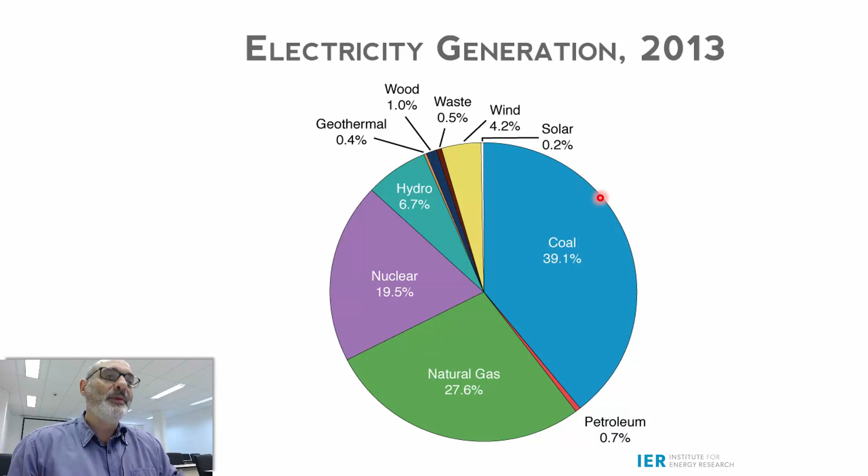I'm going back one slide just to emphasize that when we look at these types of sources, you can also think about what kind of machine you use to transform the energy content of these sources to electricity. They are mostly based on turbines, so that's what I'm showing you here. You use turbines to transform the energy content.

It may be specific heat, for instance, but it may be momentum in the case of wind, or gravitational energy in the case of hydropower. But you need a machine, a turbine, to transform this energy content to electricity. And when we talk about hydro and wind, those turbines are called impulse turbines. So what's that about, or what's this little number here, R equals 0?

So my point is that if almost 99% of all this generation uses turbines, it's very important to know how turbines work. So that's my point today. I want to show you how turbines work and how we can use this information, for instance, to optimize those systems of hydropower generation, or specifically water reservoirs.

So we call impulse turbines those that are based on momentum change. Let me just make a sketch here. In this kind of turbine you have momentum here, mass times velocity. You have a blade here, for instance, that changes the direction of this momentum. It simply changes direction. By doing this, you know there's going to be a force. The blade has to apply a force on the wind, and the reaction to this force is the force that is going to be used to generate electricity.

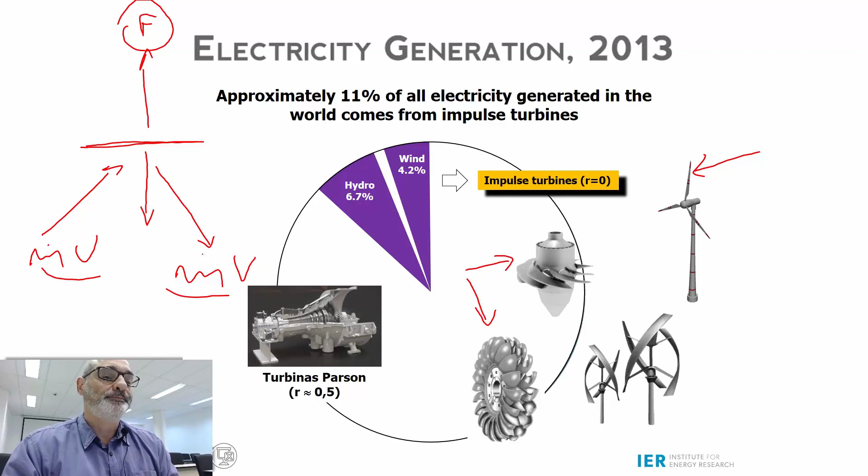Well, it depends. In the case of wind turbines, you may build from fiberglass. These blades can be made from fiberglass, while turbines for water usually use stainless steel. So stainless steel for water turbines, and a light material for wind turbines. Composite materials like fiberglass are very appropriate for wind turbines because they are resistant and very light.

Just a word about how things go here in Brazil, because we have a very different energy mix. In terms of electricity, most of our electricity is generated from hydropower, 70.6%. This is very interesting, very good, because it's a renewable source.

It's still solar energy, because it's the energy of the sun that takes the water from the ocean and transports it to high ground, so when it flows back to the ocean we can get energy from that.

So it's still solar energy, but the percentage here in Brazil is, I think, the biggest in the world. But we had a problem a few years ago, because if you put all your eggs in a single basket, you may have problems. Our eggs are concentrated on hydroelectricity, and

the amount of rain may vary during the years. A few years ago we had some problems, especially between 2013 and 14. The amount of water available for electricity generation decreased significantly, and we had to put thermal power plants into operation. These power plants run basically on petroleum and natural gas.

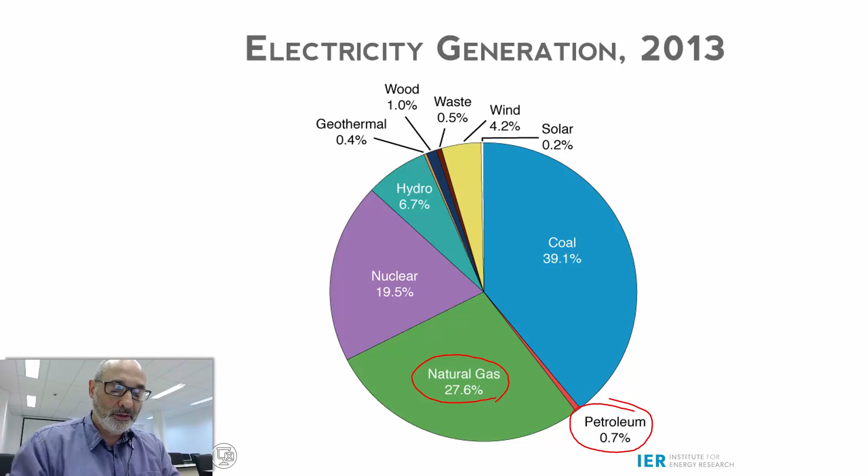So simply by putting these power plants into operation to supply demand, it changed a lot our electricity mix. You can see here, for instance, comparing 2013 and 14.

You can see that hydroelectricity decreased from 70 to 65%. Let me get my pointer, I think it's better. So this decreased, and the rest, especially coal, increased from 2.6 to 3.2. Petroleum, heavy oils, went from 5.3 to 6.8, and natural gas from 11.3 to 13.

So our energy grid, I wouldn't say deteriorated, because it's still very good. 65% is still a very good number, but that's not the tendency we would like to be seeing. So we have these thermal power plants in order to supply this.

But you have to do something to avoid this, because in addition, these thermal power plants are very inefficient—they are built just to be used during one week or one month, not during a whole year. So they are very inefficient power plants.

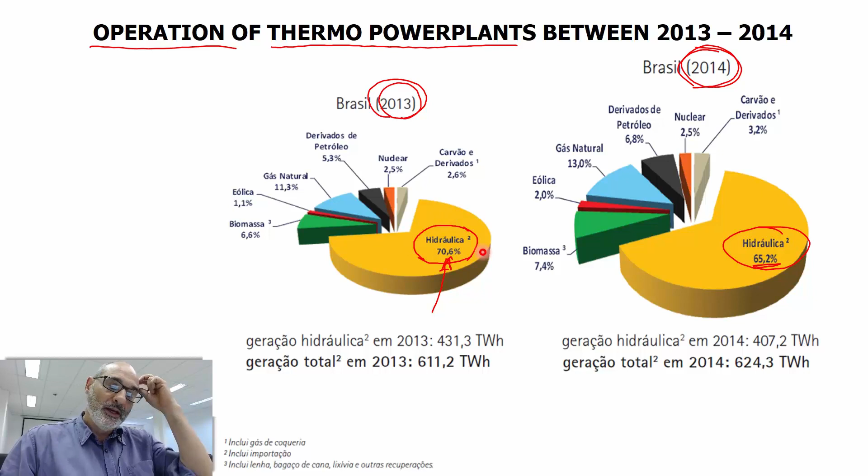So you see the importance of managing this resource. I'm going to talk today about managing it, in order to avoid or minimize this type of problem. Let me move on.

Let me talk about electricity generation in terms of potential. I'm going to compare the potentials of electricity generation in Brazil and in the world with the potential of hydroelectricity generation in the world. You're going to see that it's very limited.

Wind generation in Brazil—this is what we call the wind map here, the atlas of the wind potential, the Aeolian potential in Brazil. The darker colors represent higher potentials, and you see that it's mostly concentrated here on the northeast coast.

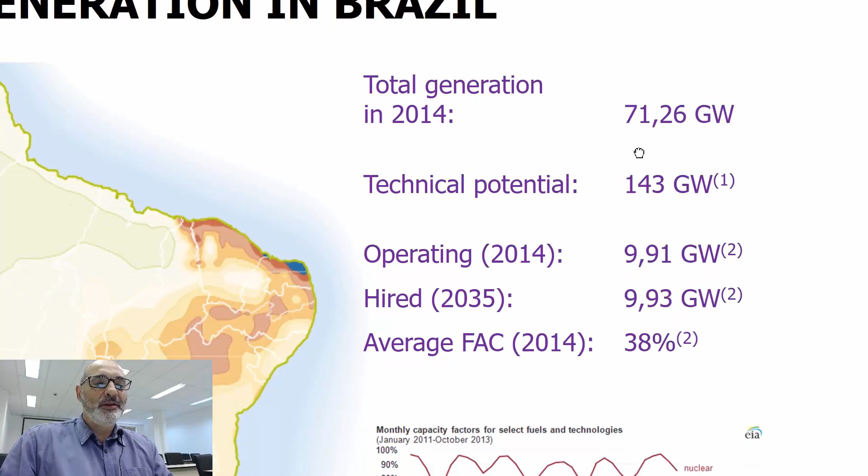Let's see some numbers. The total generation in 2014 is 71 gigawatts—so it's very high. The potential is 143. In 2014, we had only almost 10 gigawatts, and by 2035, another 10 gigawatts.

I'm going to talk a little bit about how energy is commercialized here in Brazil, about those energy figures you hear on television and in newspapers—what they mean and how we calculate these numbers, like 10 gigawatts. Another important point is that the capacity factor of our wind potential is a little higher than the world average, 38%.

This number, 38%, means I have to unzoom in order to write something down.

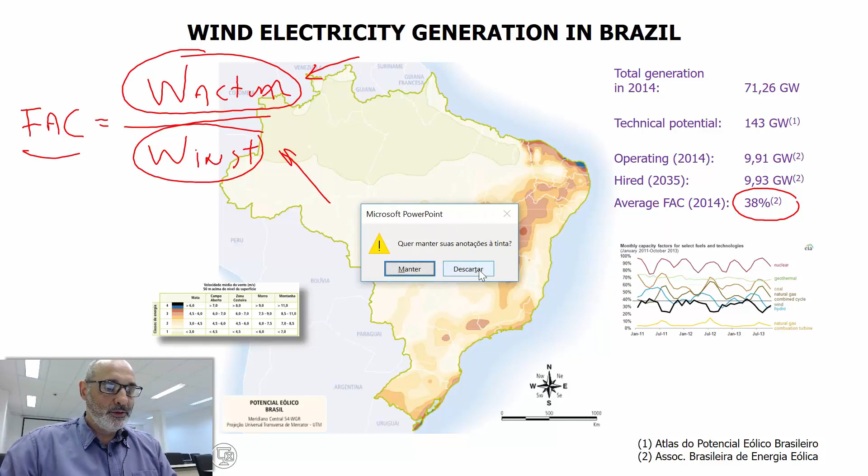In addition to these potentials, let me zoom again. So in addition to the potential, you see those colors here, they represent wind speed. Black and blue is more than 6 meters per second, orange is from 4.5 to 6, and so on. São Carlos, just to give you an idea, our region here in the state of São Paulo ranges between 0 and 3. I know São Carlos and Campinas get a lot of wind, but we're not even orange, we're yellow, or around there, in the state of São Paulo. The potential for wind generation here is low, except for the Mantiqueira region.

But that's the potential. I'm going to show you the equation, what this means, how you can transform this into kilowatts of electricity.

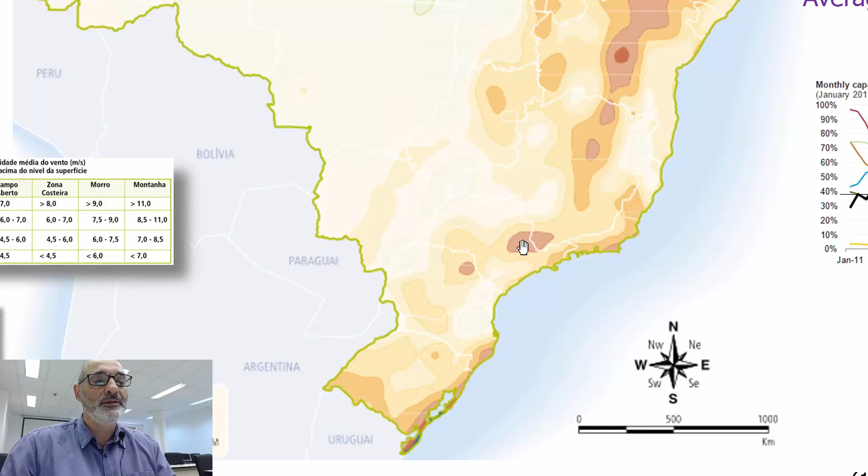But in addition to this number, you also have to account for the intermittency of the wind. The average Brazilian intermittency is a little bit higher when we compare that with other sources, which I'm showing here. I have an enlarged picture here. This graph shows the intermittency of different kinds of generation. Nuclear, you see that it varies during a year. You may ask yourself, why does nuclear generation vary in time? Because you have to stop, for instance, for maintenance. You have several types of problems that make it impossible to have 100% constant generation.

It's not unnatural, this oscillation is natural. Geothermal energy is the most constant, typically. And you see wind here in black. This curve is wind generation in the world, and our average is represented here in dotted line. It's 38%, and it's visually a little bit higher than the world average. So we don't have a lot of wind sources, but they are very stable. This capacity factor is a little bit higher, and we have 143 gigawatts. I don't know if you have an idea about this number, but this is almost 10 Itaipus.

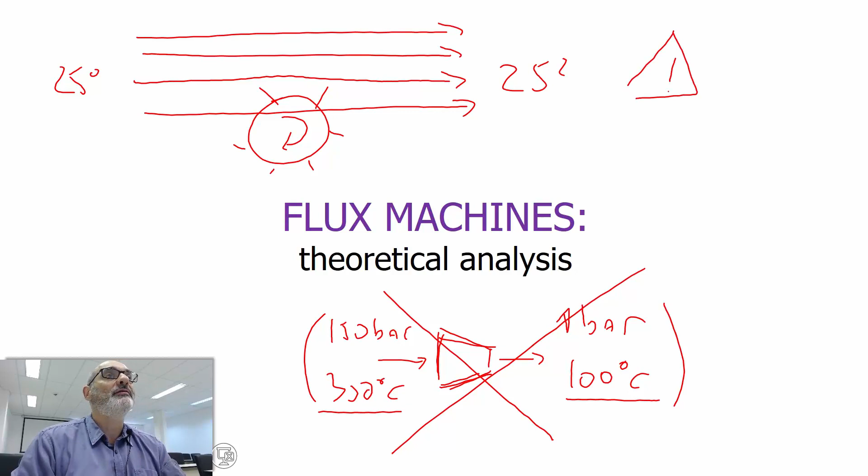So I'm not talking about this right now. I'm talking about this type of generation here, in which you don't have temperature variation during the process. So what are the equations?

Well, they have to be based on the first law of thermodynamics, so I'm recalling the first law of thermodynamics, and just to show you the thermal component of energy - remember this is the energy inventory - you have heat and work going in and coming out of the control volume of your system, and you have energy associated with these mass flow rates.

What I want to highlight, because this expression you already know, are the components. You have a component associated with thermal energy - we could call it thermal energy, associated with temperature. And you also have components associated with mechanical energy, related to gravity.

So gravitational energy, and related to kinetic energy. So what we're going to analyze here are turbines that use these components, these two components, what we call mechanical energy. You're going to see that wind turbines use these components, and water turbines mostly use these components, in most of the cases. So that's what I'm going to show you.

Yeah, go on. I lost signal. I lost the background. From our conference, I can do nothing about that except verify that it's on. YouTube, yeah, I'm still transmitting. Let me see on YouTube. Yeah, it's still being transmitted through YouTube. So I hope you get a signal in a few moments. Okay, let me continue.

I was talking about measuring the velocity of the wind and also the pressure along these lines. Velocity, as I said, is decreasing from left to right, from V1 to V4, and you have a continuous line because you have continuity; the mass flow rate cannot change. Pressure, on the other hand, has a jump here. Since velocity is decreasing, pressure is increasing, and you have a step here, and it goes to the maximum at the exit.

This step, this difference, multiplied by the area of the windmill, gives you this force, which is the propulsive force that's going to be used for electricity generation. So the reason why you have this step is the force applied by the blades. Let's move on and write down our equation.

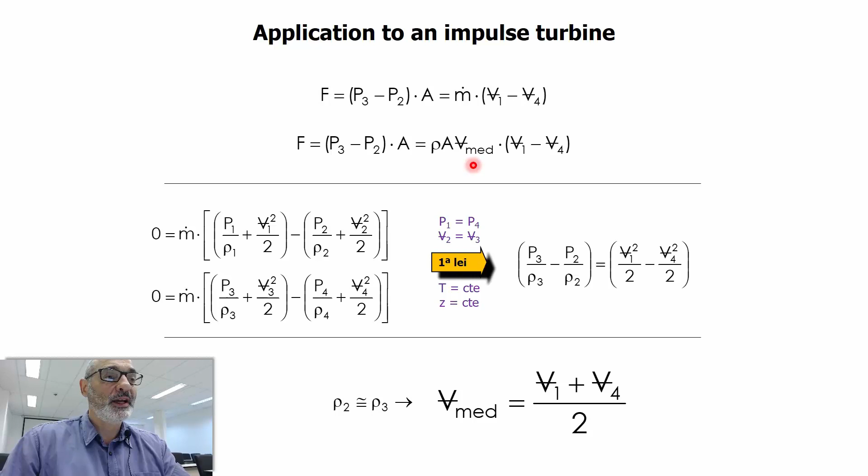And we can use this equation, combined... let me just explain where I want to get to. I want to define a way of calculating an average speed for our assessments of the wind potential. I forgot an important formula: you can define a kind of power density of the wind. If you divide W by the area of your windmill, you have small w, in watts per square meter. That's the potential density of the wind.

So if you want to generate, I don't know, 1 gigawatt of electricity from wind, and your wind is 6 meters per second in that particular place, you can use these numbers in order to calculate the amount of area that you're going to need.

And area means number of windmills that you're going to need to generate that amount of power. So that's how you use this part. But this is a theoretical maximum. You're going to see that you still have to multiply by the capacity factor, because this amount is instantaneous, obviously. So if you have this during 24 hours a day during the whole year, but that's not a reality, that's not practical.

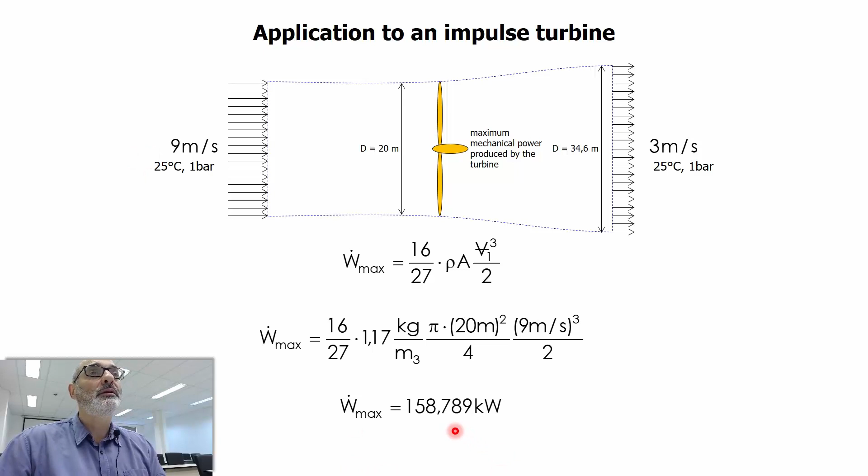This is a significant number, but remember, this is comparatively high speed. As I mentioned, this must be in Patagonia or in Greenland, for instance. And if your capacity, yeah, go on. What happens at lower temperature? Let's say you have 9 meters per second. Lower temperatures affect the density. So the density at lower temperatures is higher, so it's going to increase. We can do this calculation right now.

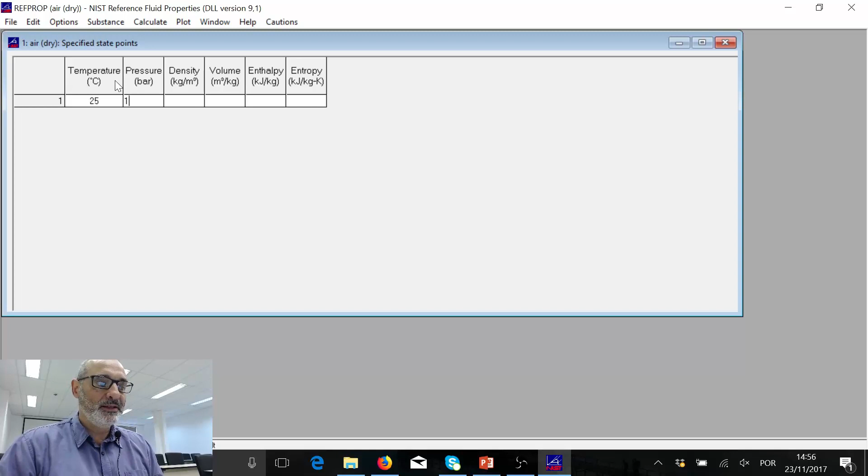For instance, I'm going to stop my presentation and calculate the density of air at these temperatures. Because I mentioned this must be in Patagonia, let's calculate that near 0 degrees. So let me choose pseudo-fluid air, and let's calculate the density at 25 degrees, 1 bar, that's the example I showed you, and 0 degrees, 1 bar. So you see density varies from 1.16 to 1.27.

So in these calculations, 1.17 is going to change to 1.30 or something like this, or 1.28. So this number here is going to be 1.28. So it's going to increase this power a little bit. So it's better to have lower temperatures because the density is higher. Okay? So that's an example of how these equations must be used.

You also remember this is the maximum. You should multiply this by the capacity factor, which here in Brazil is 38% on average. So you're going to get a smaller number. So the number that you obtain here, just to start using the Brazilian jargon, is what we call physical power. So I'm going to write it in English. Physical power, that's the Brazilian term. That's the average power that you can get in a year.

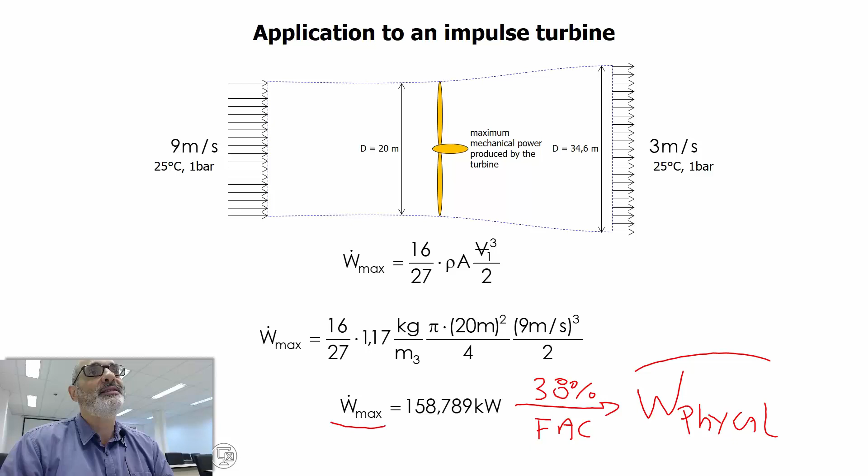So if you're going to sell this energy to someone, you're not going to sell this number. You're going to sell this one, because that is what you can expect from this statistical number here, the capacity factor. Let me move on.

So just to still develop these equations, that's the formula that we deduced for the wind generation in terms of ξ, which is, remember, the relation between exit to input wind velocity, what we call power coefficient. So wind power is this number. It's impossible to extract 100% of this power from the wind. It's physically impossible.

Well, by design, as I showed you, ξ can be made to be equal to 1/3, which maximizes the power coefficient. If you plot the power coefficient here, you see that the maximum value is attained when ξ equals 1/3, just to show you this. And when you replace 1/3 in this formula, you get 16 divided by 27. So that's why you have that strange number, 16 divided by 27.

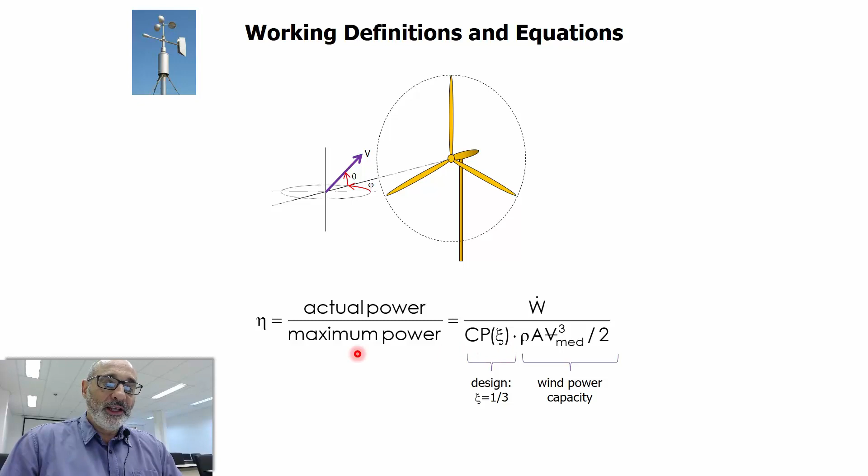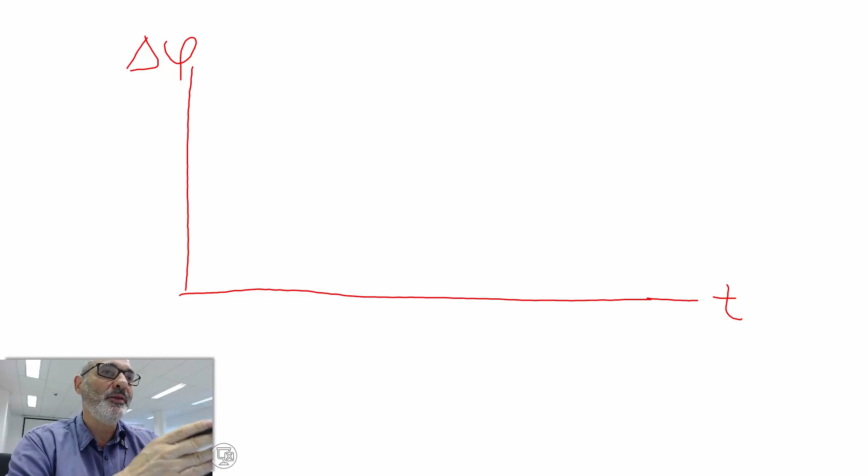Let me explain this better. I'm going to create a blank slide here in order to draw something for you. So, as I was saying, suppose that here we have time, and here is the difference in terms of alignment, delta phi. Delta phi is the alignment of the windmill compared with the wind direction. Sorry, let me change a little bit here. So here is time. Let me get another color.

So if you have perfect alignment during all the time, it's going to be like this signal here. If the wind changes, the windmill can realign, but it's going to take some time. So the wind changes and you have a deviation during some amount of time, and the point is that during this period here, from this instant to this, you have decreased conversion efficiency.

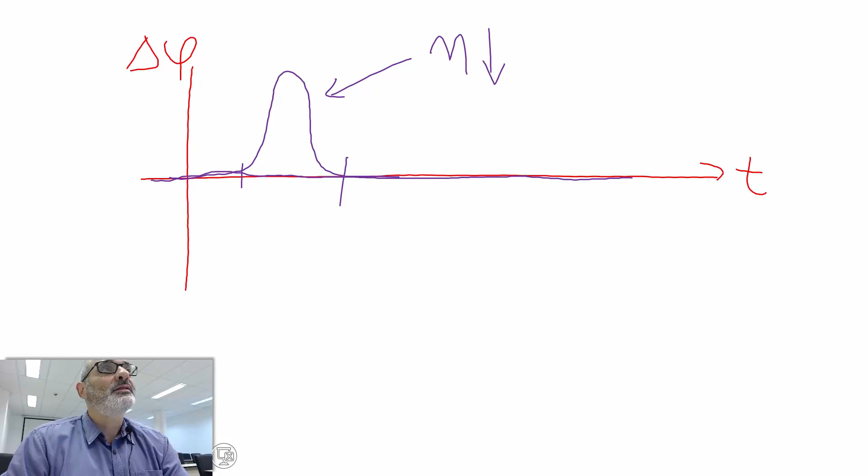So all windmills are built to realign with the wind automatically, but depending on the geometry and the configuration of the mill, this may take some time. Is this clear for you? Okay, let me move on.

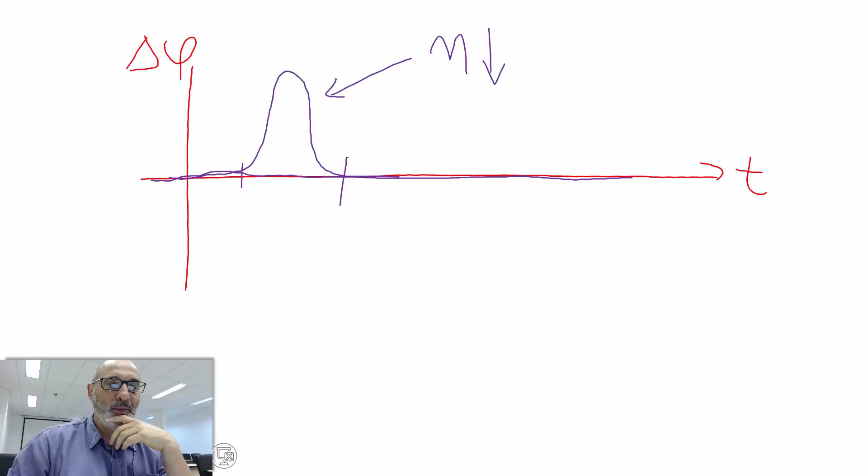And I want to talk now about other factors causing efficiency losses, because as I was elaborating here, you have a problem related to the direction of the wind: wind coming from a certain direction and your mill slightly misaligned with it. You have other types of effects, for instance, what we call wingtip effects. The blades here are exactly like airplane wings. You have high pressure here and low pressure here.

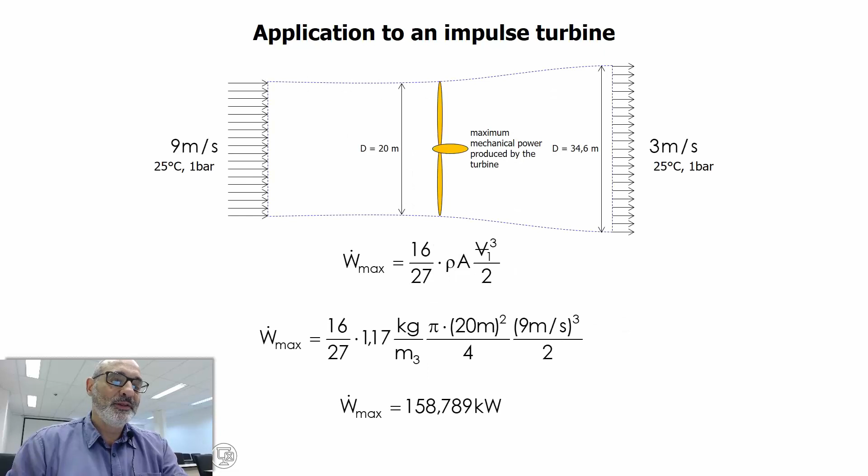I'm going back a few slides just to show you this. You see that you have low pressure here and high pressure here, and the difference is exactly the lift force. So with high pressure here and low pressure at the wing tip, what's going to happen? The fluid is going to move from the high pressure region to the low pressure region, forming what we call wingtip vortices.

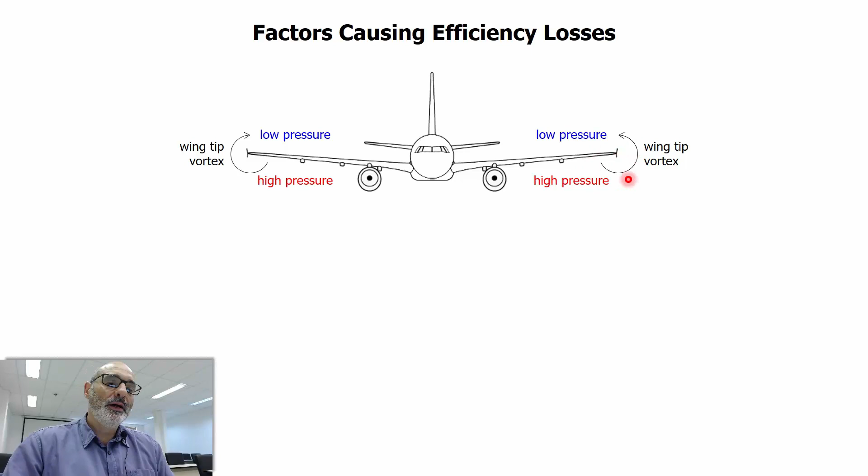So you have these vortices here, and they consume energy because they use energy to create this circular movement. This is a very common phenomenon in airplanes. It's very easy to see: when an airplane passes, you see these vortices. If you type wingtip vortex on the internet, you're going to get very beautiful pictures of wingtip vortices.

But the point here is that you have losses of energy, because you're spending energy to create this circular movement, and the idea was to convert all the internal energy into kinetic energy, in the case of the airplane. So you have wingtip vortices in windmills.

Just to show you, in aeronautical engineering, in order to solve this problem, the engineers developed these small structures here, called winglets. They developed these devices, which generate an opposing effect. They tend to cancel the vortex, but they cause drag. So it's a trade-off solution.

Another possibility is, well, if the problem is at the tip of the wing, let's build a wing without a tip. So you build this kind of structure here. This is very optimistic, I should say, but there were some models that were built, and you can see this in windmills.

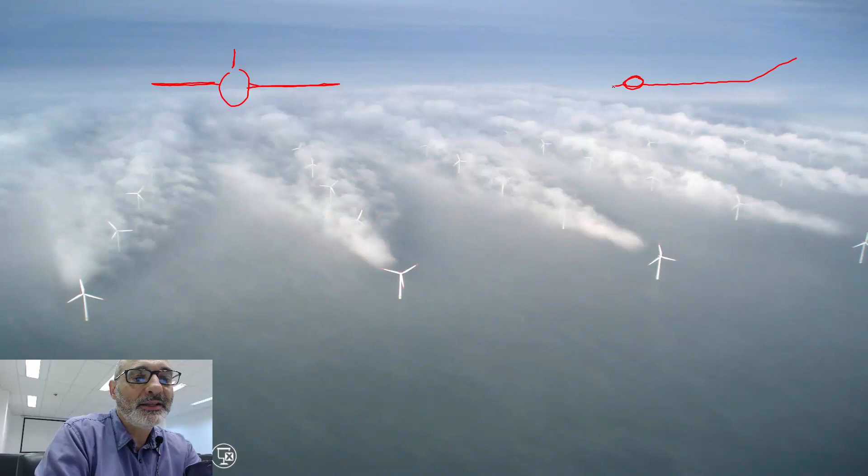And that also explains why gliders, let me draw something here, I don't know if I'm going to be able to draw a glider here, but let's compare. For instance, a commercial airplane is something like this, and a glider, the length of the wings, sometimes it's even like this, it's much longer. So that explains why these gliders have very long wings.

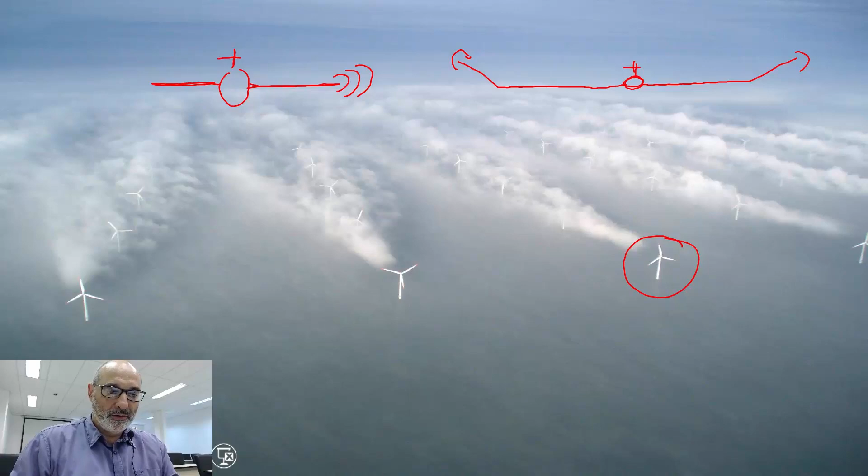Because, well, the longer the wing, the smaller these vortices here. And that's why also these windmills have very, very slim and long blades, in order to decrease this phenomenon. Some words about wind turbines, some details here to depict a scenario.

First, the longer the blade, the more efficient the windmill, because you decrease these wingtip vortices. So the tendency you see during the years is to have bigger and bigger windmills. Well, after, I know, 100 meters, you start having problems building and installing these windmills, because you have to produce these blades and you have to travel through the countryside, where you have small roads.

So what limits the size of the largest windmill onshore is actually the road systems, the size of the roads. So that is also an advantage of moving offshore. Offshore you can build very big windmills, because you have a barge here, for instance, with a crane, and you can build these very, very large windmills. So no problem. And that's the actual tendency.

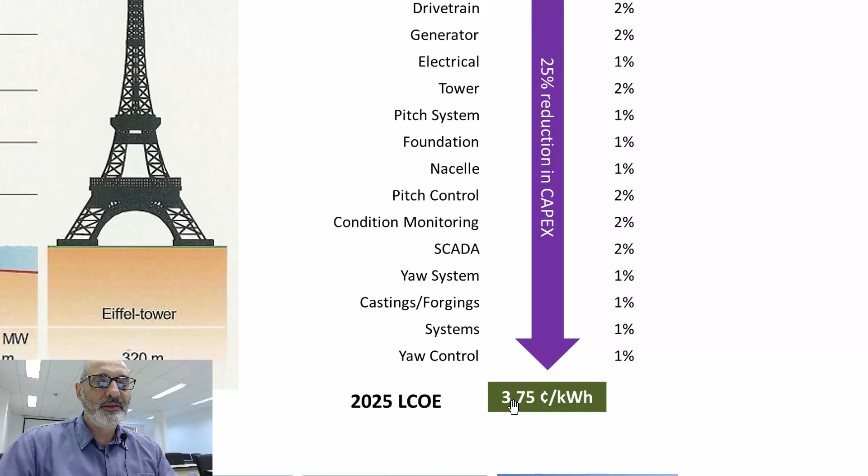4.5 cents per kilowatt hour. In 10 years, it's going to decrease, expected to decrease to 3.75, and this decrease, yeah, that's what's interesting about this result here. Okay, so this decrease

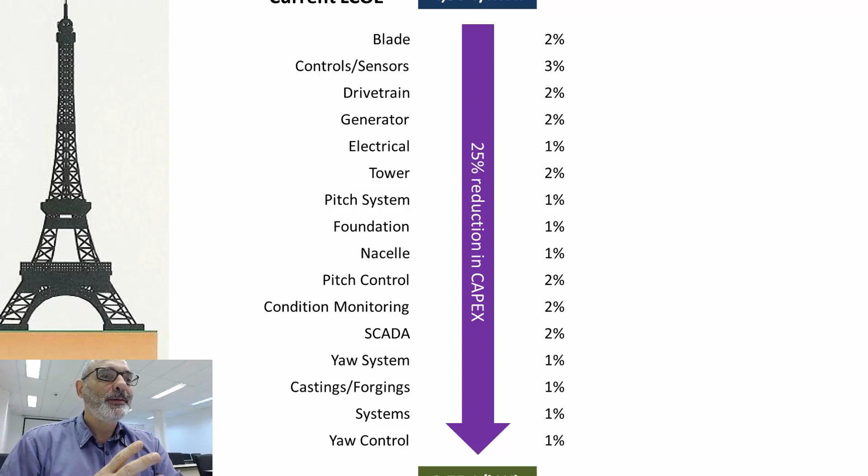is obtained by a series of incremental gains. You have a small gain to obtain in blade geometry, for instance. You have a small gain in order to obtain, for instance, in developing more stable, more structurally stable towers, and this is related to the deviation, the stability of the windmill, of the turbine. So you have a series of incremental developments, the controlling system, the yaw system, that's what I'm talking about, and so on. The foundations, this is also to structural stability and so on. So you see, you have a very significant reduction, 25% in the cost, but this reduction is actually obtained through a series of small incremental developments.

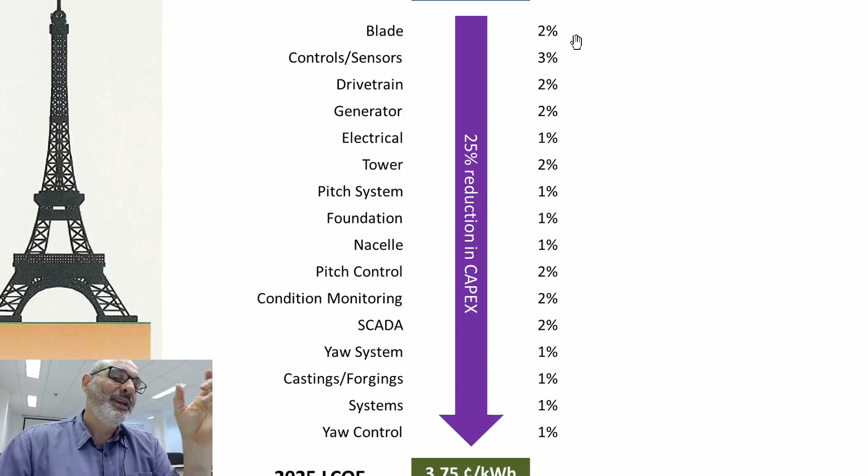And this is to show you, to justify when we state that wind generation, wind turbines, is already a very mature technology. It's not a technology in development. Well, these types of technology, these balloon turbines and so on, I'm going to show you another ones in a few moments, are still in development. But these very traditional windmills, this is already a very mature technology. Okay, you can say that, for instance, from this type of scenario.

Moving on, you have very untraditional windmills or types of ways of generating electricity. As I mentioned, balloons. So the higher you go, the stronger the winds.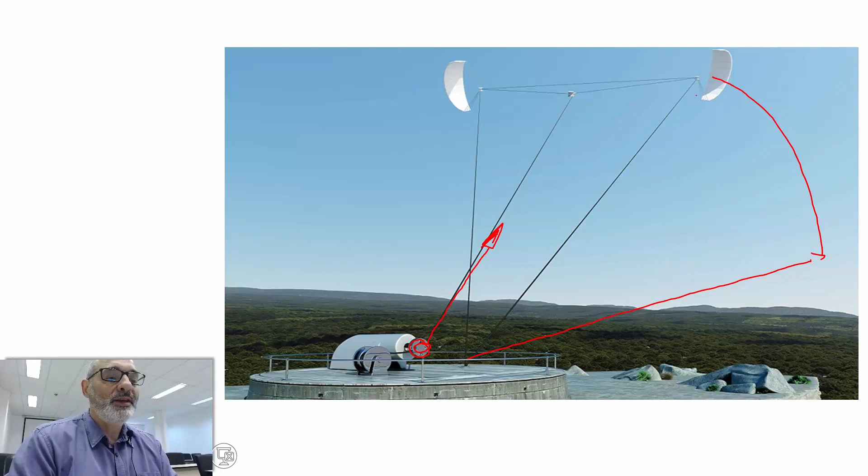So it's very simple. You see this pulley here. So what the robot does, it increases the length here, it gives some slack to the kite. So by increasing this length, what's going to happen? It's going further away and down here. So you release the force here, and the kite goes down and farther apart. Then when you do this, you have a force. So by doing this, the kite manages to generate some force. So the kite is pulling this cable here. So you have a force here times this rotation here, so you have power.

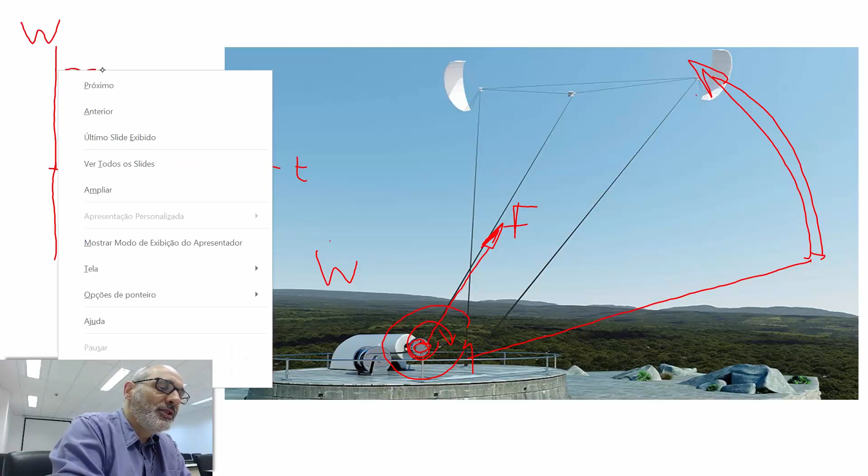But your kite goes down, then you have to rewind the cable so that the kite goes up again. So you're going to spend some power. So you can generate power in this first phase, and you spend power on the last phase. So the idea, if you plot the power that you generate and the power that you spend during time, is that you can generate power for a certain period, then you have to spend some power, then you generate again. You see that the average is positive, so you can generate some power from the system. That's explained in this graph here. You have an active phase in which you can generate power, and you have a return phase in which you may or may not spend a significant amount of power. So that's a technology that is being tested.

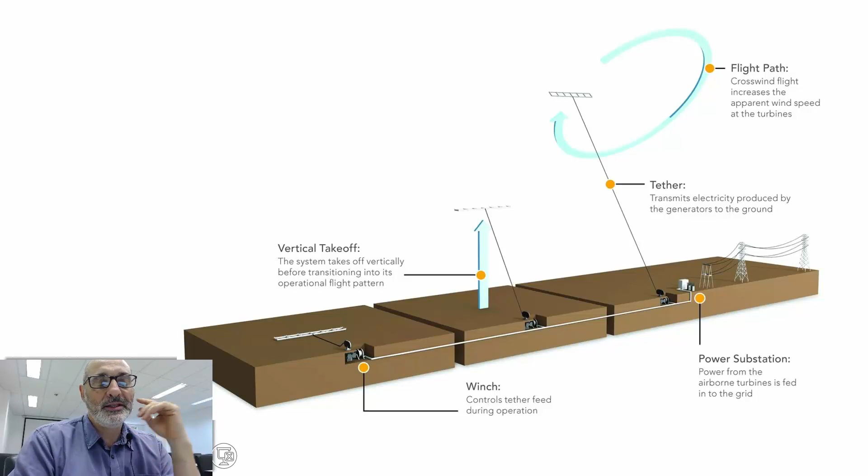You have robots to do this, that in addition to making these operations, it assures takeoff and several other types of piloting of this wing, because it's actually a wing. This is another type of kite. It's a little bit different from this configuration here, because this one does this type of movement here. This one is a wing, it circulates like this, and during this circle you have an active phase and a passive phase, I would say, like this, in terms of energy generation.

Well, this is research, it's not widespread applied. You also have... I want to start switching, because I have to hurry up a little bit.

This is feasible, but here in Brazil especially, I would say this is not practical, because our rivers contain a lot of organic materials, biomass. You have trees, you have all types of debris being carried by the river. You may have a whole tree being carried, and when this debris hits these windmills, it's going to spoil. You have maintenance problems. So this is a problem here in Brazil. For this to be applicable, you have to have very clean rivers, and this is not very easy to get, but it's possible.

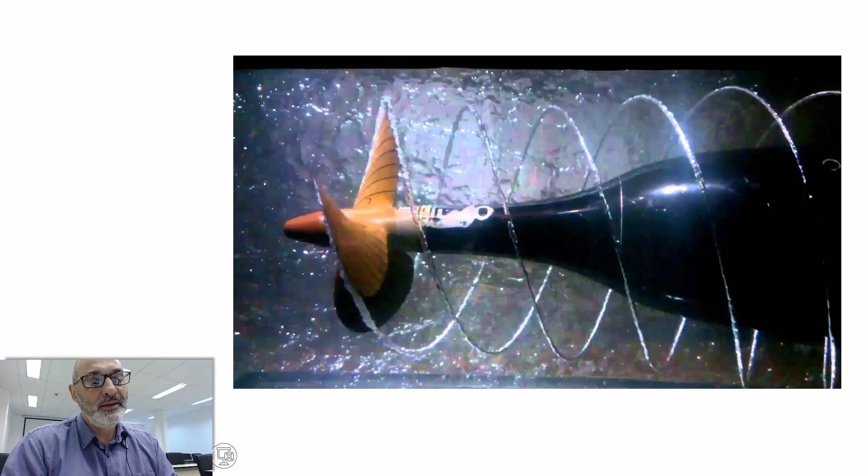Another problem you have related to water, that you don't have in air, is cavitation. Since you have different velocities, there may be some places, especially on the tips, where the velocity is very high, and when the velocity is high, the pressure is low - that's Bernoulli's equation. So when the pressure is low, you may have water vapor. These small bubbles are vapor bubbles, and that's cavitation. I don't know if you've heard the term cavitation.

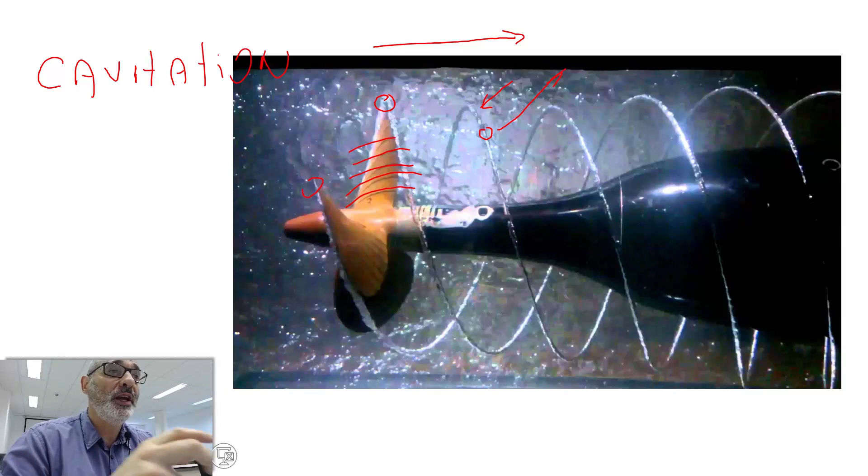The problem is that when you have a bubble formed, this bubble is stable when the pressure is low, but if for some reason this bubble goes into a region where the pressure is high, it's going to implode. And when a bubble implodes, it causes what we call a water hammer - like a huge impact related to the implosion of these bubbles. You may have very huge pressures associated with this implosion, and these can erode parts of the blades, as shown here. So you have maintenance problems.

I remember some years ago, or some 10 years ago, I visited one of these hydroelectric power plants here near São Carlos, in Ibitinga. The turbine is very big - a person here would be something like this. You can go on top, and we had this - you could observe this kind of problem. So the workers were correcting this problem, because you have cavitation.

Is there a problem in water pumps also? Yeah, cavitation? Yeah, exactly, you may have this. It's the same thing? Yeah, exactly the same thing - cavitation related to these very huge pressure variations due to the implosion of these cavitation bubbles. If you could see with a microscope, it's like having microscopic hammers impacting on the surface of the metal, and you get this kind of erosion. It's a very big problem even for ships - you have this in ships also. Cavitation is a very significant problem.

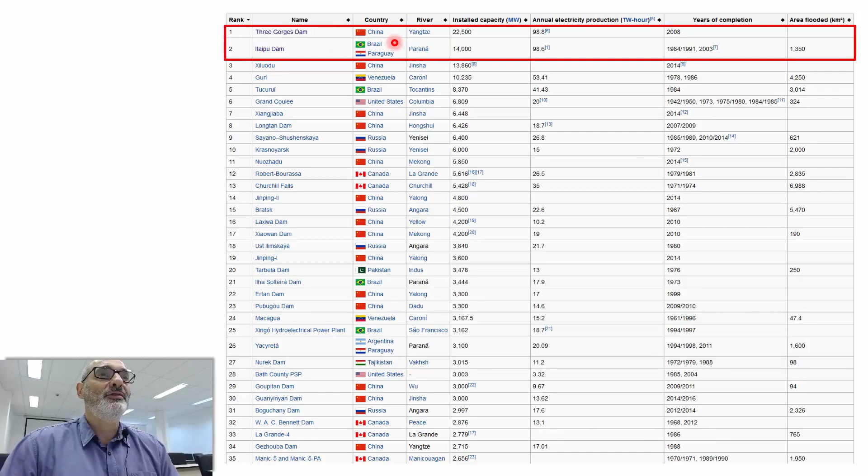I'm emphasizing this point because here in Brazil we have a special concern with the environmental impact that these reservoirs are going to cause in a specific region. This is okay, but we must be aware that reducing the reservoirs reduces their efficiency. That's the central point of this talk, and I want to justify this through a simulation.

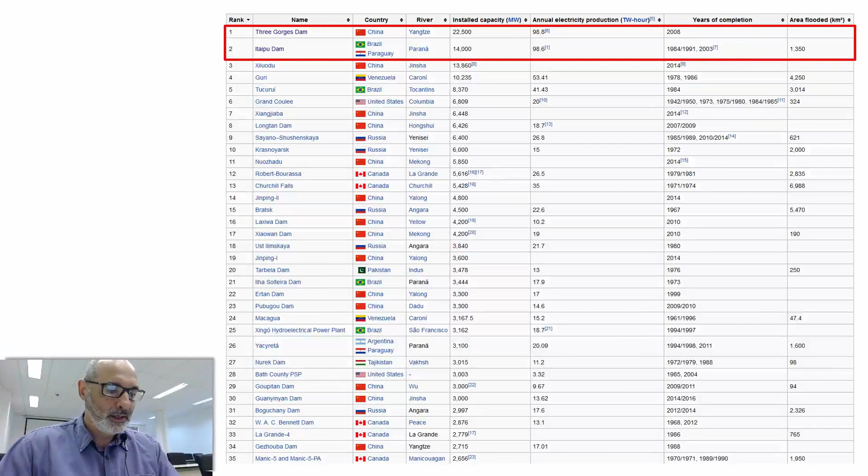What I wanted to highlight is not the installed power. Let me go back a few slides and zoom in to show you the installed capacities and annual generation. The installed capacity in Three Gorges Dam is almost twice that of Itaipu, but the annual generation is almost the same. Why is that? It's not only due to the capacity factor, but also due to the reservoir - I'm going to show you this.

I came back here because the numbers are very out of date. So the point is the reservoir, not the turbines. As I mentioned in the first slides, the functionality of the reservoirs - you see the reservoirs compared here in this table, Itaipu and Three Gorges. In Portuguese, gorges is garganta.

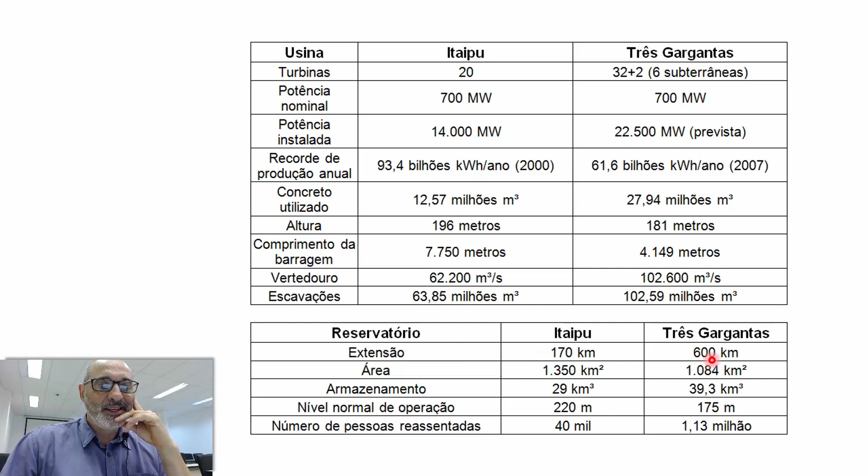Since Three Gorges is in a valley, the extension is very significant, 600 kilometers, while in Itaipu it's 170 kilometers. The area is roughly the same - Itaipu is larger because, as I showed in the picture, it's a very flat region in Brazil. The amount of water stored is 29 cubic kilometers versus almost 40 cubic kilometers. This is stored energy, and the potential is related to the height of the water: 220 meters in Itaipu and 175 meters in Three Gorges.

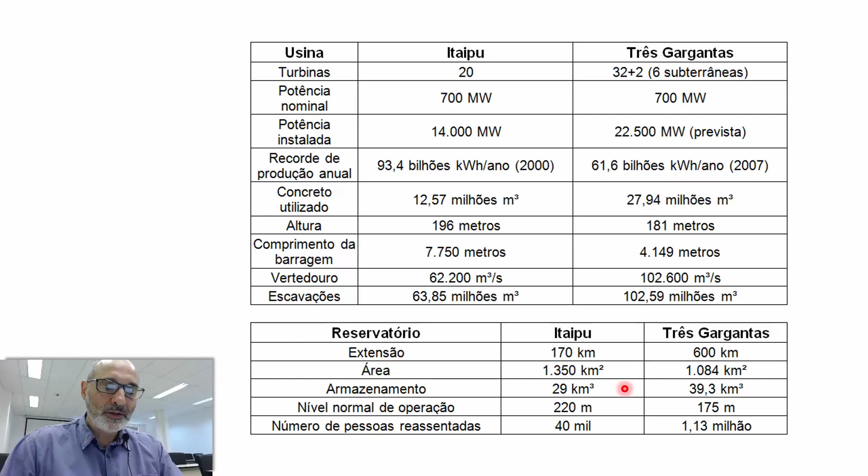So with these characteristics, we're going to run our final simulation. I'm going to model the system, and then we're going to change the size of the reservoirs in order to simulate the operation of a system with big reservoirs and with small reservoirs. The idea is to compare Itaipu and Three Gorges, or the equivalent systems.

Let's see the equations for this type of generation. You have a reservoir, so you have a difference in height from point 1 to point 2. If you define a control volume, imagine a small tube starting at point 1 and going all the way through the turbine, ending up at point 2 - that's my control volume.

I'm not going to be able to draw this properly, but you can use your imagination and imagine a small tube going from 1 to 2, and that's going to be our control volume, okay? So when we write the equation, energy conservation, for this control volume, that's the same equation as before, in which we neglected the internal energy because temperature is constant. That's the equation that you have: pressure, velocity, and gravity, the Z components.

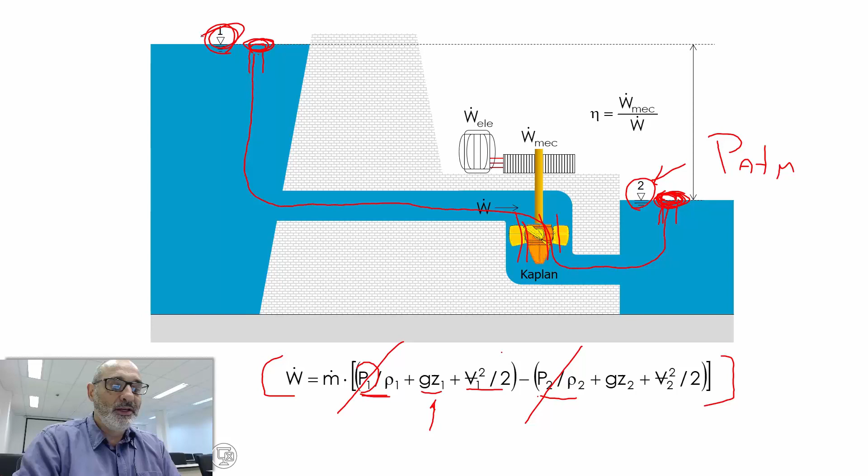What's the velocity at 1 and what's the velocity at 2? It's 0. It's the same. I'm not talking about the velocity here at the turbine, I'm talking about the velocity at this position and at this position. So it's 0, these terms cancel, and you end up with only these terms, because Z1 is different than Z2. So what you get is that final expression here, which accounts for the power generation from a variation in height.

So that's why the height of the water level is important. And that's why, going back a few slides, Itaipu has a bigger height than Three Gorges, and that's why it tends to generate more electricity, because the height is bigger. Okay, so that's our working equation. We're going to apply this.

So that's the maximum power that I could manage to generate from this variation from 1 to 2. But I also have an actual power, and the actual power will depend on all the problems related to the efficiencies, to the flow through the blades of the turbine. So the actual power is going to be slightly lower than the maximum theoretical power, and the relation between the two is the efficiency.

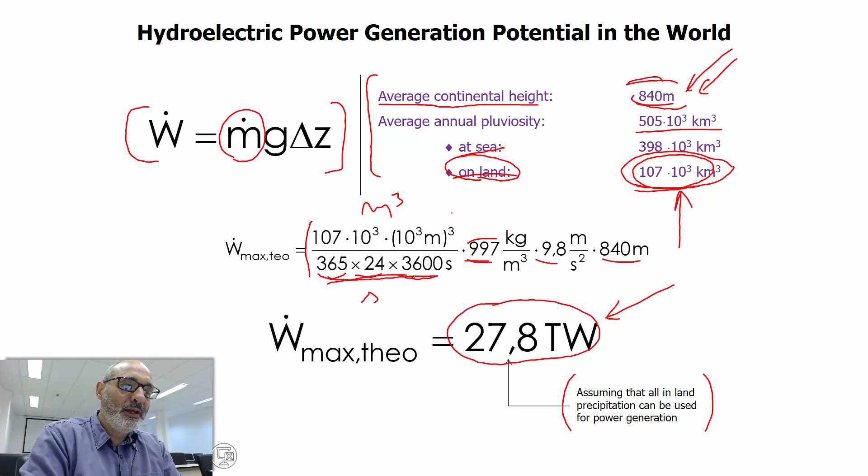27.8 terawatts. This is a very, I would say, optimistic number, because it considers that all precipitation inland could be used for power generation. And we know that's not the case, because most of the water that falls is absorbed by the soil, goes to the water tables and so on. Just a fraction of this number can be used, but no problem. The idea is just to have an assessment. Let's compare this number that we obtained from these very simple calculations with actual numbers.

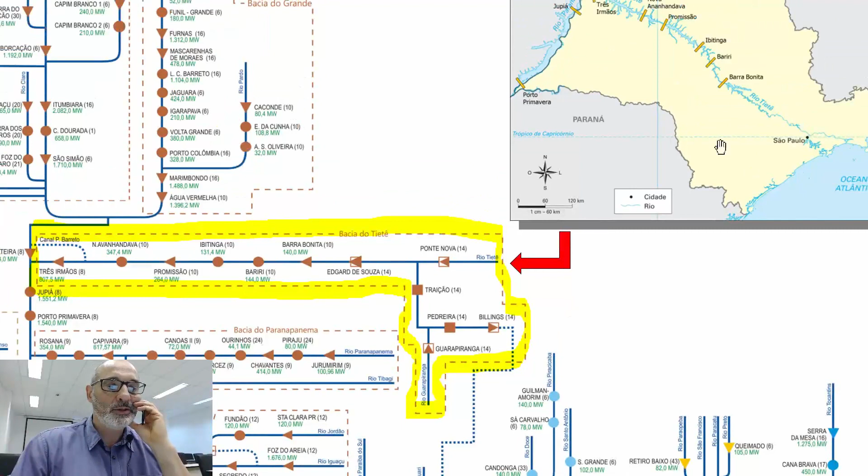So let's see how this system is here in Brazil. So Tietê is here, Rio Tietê, you see here, and those are the reservoirs. This picture is very rich because it shows if you have places for ships to go up and down through the reservoir. It also represents the capacities of the reservoirs.

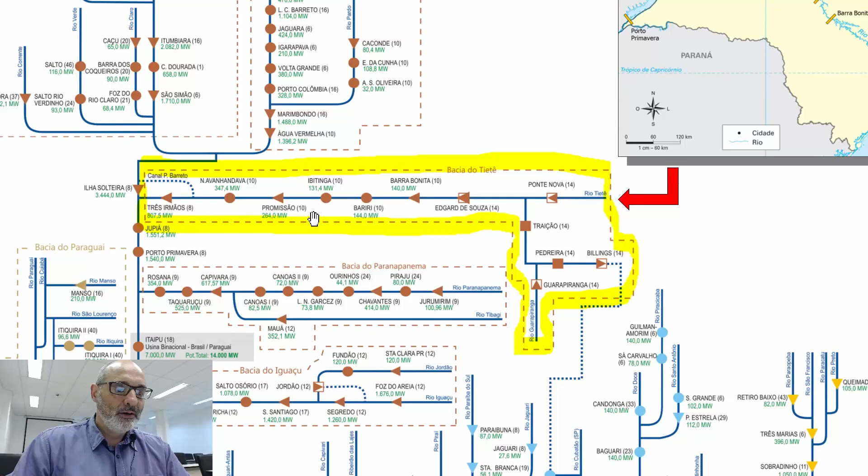This graph has several different types of information, so it's very rich. Okay, so that's Tietê. Tietê goes to the, let me see, Paranapanema is another river in Paraná, okay? So they get together, and Rio Iguaçu, okay? So let's follow the water. So that's Rio Tietê in São Paulo.

And all these circles and triangles and so on are generation units, okay? So the city of São Paulo is more around here, okay? So Billings, you see Billings and so on. Well, I was trying to give you an idea, but let's follow the water. So that's the Tietê River.

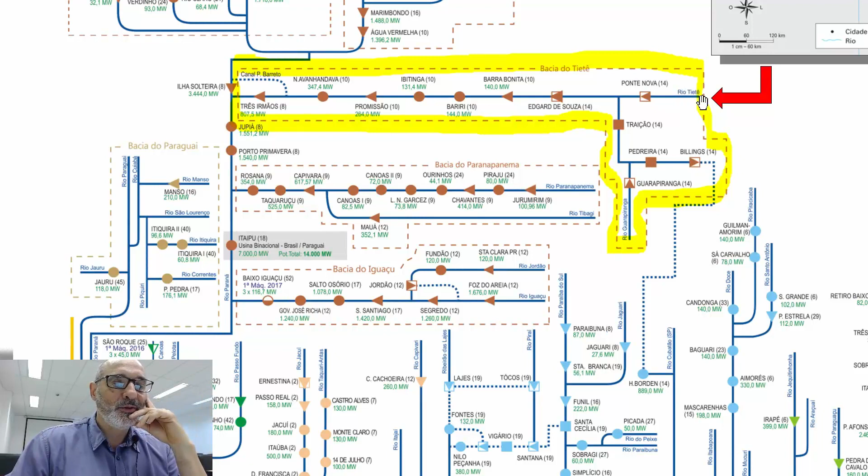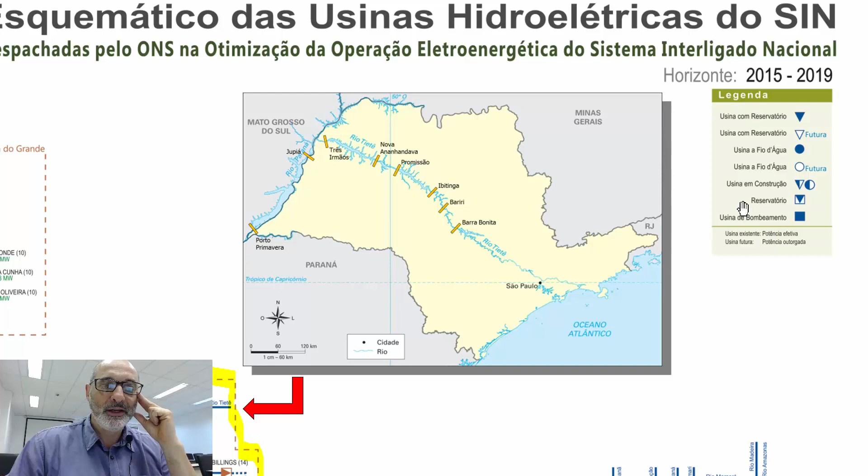power plants with reservoirs. Those are future, okay. Fio d'água, you don't have reservoirs, okay. Future and in construction and so on, okay. And the reference is given here. Okay, so this picture actually is from what we call the Operador Nacional do Sistema Elétrico, the national operator of the electrical system here in Brazil.

So he has this image here, okay, all the reservoirs, and you can control the operation of each of these reservoirs, okay. You can press a button and increase the flow rate in a specific power plant, or if you don't have this level of automation, you can simply telephone the local operator and tell them to increase flow rate, for instance. Okay, so the idea is that you can operate the entire system from a single room. Okay, so that's the point.

And the simulation that I'm going to show you in a few moments is how to operate. What's the strategy of operation? Okay, in order to maximize the overall energy production, okay, both in terms of volume of energy, but also in terms of stability of generation, okay.

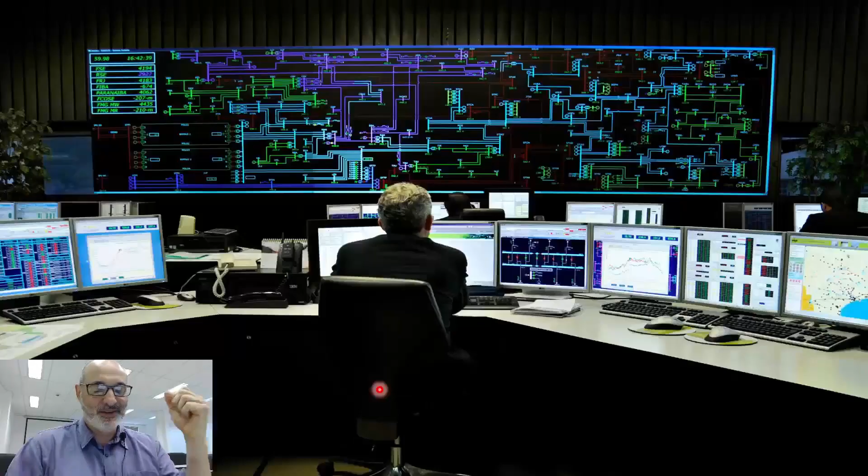A few words about our institutions, okay. I'm going to elaborate on this in the last class next week, okay. The institutions associated with the electricity sector in Brazil. Okay, so I'm talking about the national operator of the system, as we say here in Brazil. Okay, so this is the pilot, in the pilot's cockpit, because this resembles a Boeing, okay, a very huge airplane, very sophisticated, very complex. So the operator is like the pilot and co-pilot, okay.

But another important institution is the Electrical Energy Commercialization Chamber, CCEE. So all the electricity bids that I'm sure you hear on the news are organized by this institution, okay? And I'm going to show you some things about CCEE in this class, but I'm going to show you more in our last class, okay? So these two institutions are, let's say, under the umbrella of the Electrical Energy Agency, okay, which is related to the Mines and Energy Ministry and so on.

Okay. Also, another important institution is the Energetic Research Corporation. That's its name in English. Okay, Empresa de Pesquisas Energéticas in Portuguese. Okay, so all sorts of calculations and, for instance, the wind map was organized by this institution. Okay, so all types of studies, especially studies and research, are fostered, I would say, by this institution, and they are publicized. Okay, so you can increase development in general in Brazil.

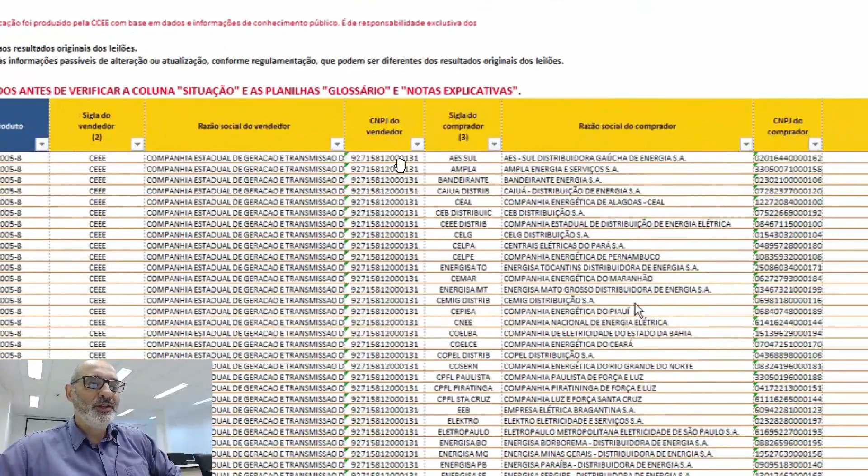Okay, so you have economic information, and also all sorts of information for every contract related to these bids. You have, for instance, the total amount of energy that was commercialized. If this is to be delivered in 10 years or in 20 years and so on. You have all sorts of information, the price, if it's a bid A0, for instance, that's for instantaneous, immediate supply.

If it's a bid A5, for instance, the seller has 5 years to start delivering the energy. Okay, so you have many types of information. I'm going to show you next week, and from this database you can, for instance, build this type of graph. I didn't bother to put the current data, but this graph is the total amount of commercialized energy.

So physical gigawatts, that's the installed capacity multiplied by the capacity factor. So this is real. And you see that in 2015, that's the current date, you already know how much new energy you're going to have in the following years. So you have increased amounts, and then it drops.

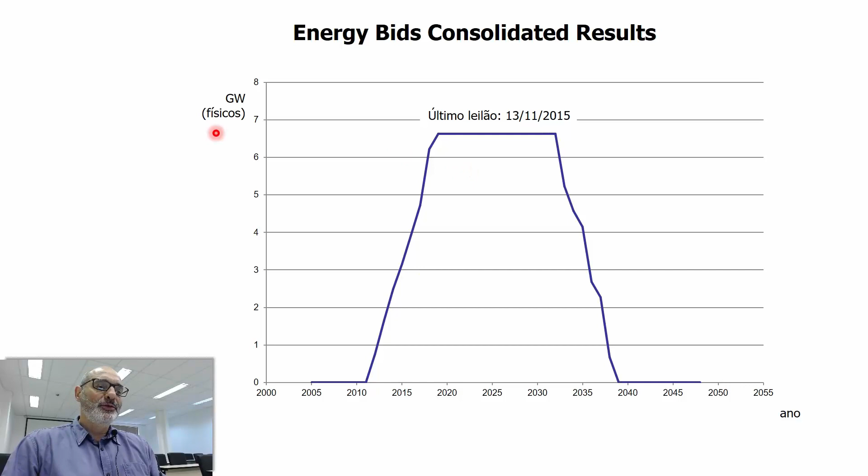You can filter, for instance, in terms of source. For instance, if you want to know how much energy from wind you're going to have in the following 35 years, you have this information. It's very easy to filter that from that spreadsheet. I'm going to show you next week.

So an example of application: optimized design and operation. In order to explain how you can have an optimized operation, you must know, at least in rough lines, how a hydroelectric power plant is designed. So I need to talk a little bit about design in order to justify why the operation has to be that way. So I'm talking about design first.

So let's see the problem, and let's define, I would say, a synthetic problem, just to exemplify. Let's take this case just to build a scenario for us. So we have 3 reservoirs like this. That's the flow rate of the main river, 100 cubic meters per second. So that's the river feeding this first reservoir. That's the height, the nominal height. I'm going to explain this.

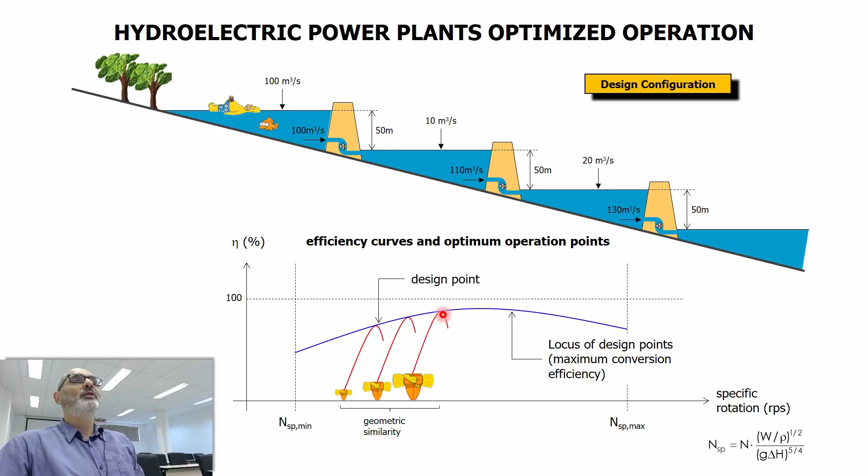So we're going to calculate a specific point, and the turbine that goes on this specific point is the one that has maximum efficiency. So that's how things work. And what are the types of water turbines? There are three types: Pelton, Francis, and Kaplan. In Ibitinga, for instance, it is Kaplan.

I don't know if you know, in Cubatão there's a power plant called Henry Borden. It uses Pelton turbines, for high altitudes. Delta H is very big, so the normalized specific rotation is low because delta H is high. So a Pelton turbine is more appropriate for hundreds of meters of delta H. Kaplan turbines are more appropriate for small altitudes, 50 meters, as we're going to use in our case.

And Francis turbines are a kind of intermediary. It's like a flex fuel engine, because it works at higher altitudes and also lower altitudes. So if you have a reservoir with a very huge variation in terms of height, it's better to choose a Francis turbine because you have more room for optimization. So that's our market.

Let's say we have to choose a kind of turbine. When we calculate the specific rotations for the data that we have, this height, this flow rate, and so on, we get these results in terms of specific rotation: 3.14 and 0.5. So we're going to choose a Kaplan turbine. 3.14 is something around here. We could choose Francis, but I'm going to choose Kaplan, because I know that in the Tietê River they are all Kaplan turbines, just to remain close to our local reality here in São Paulo. So we're choosing Kaplan turbines.

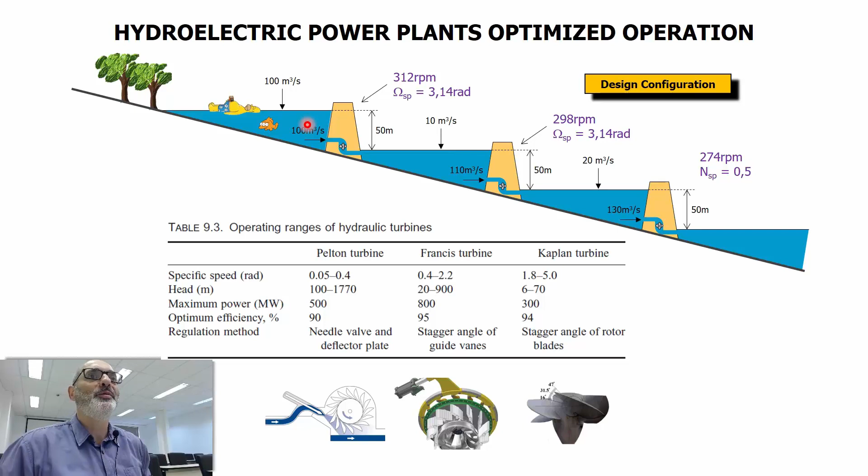Let's suppose that each reservoir has one optimization function, phi. I'm going to define it in a few moments, but suppose each one can be optimized. You can define what's going to be its optimization function. And if you want to optimize the whole system, if you want to maximize the whole system, you can, for instance, add these functions.

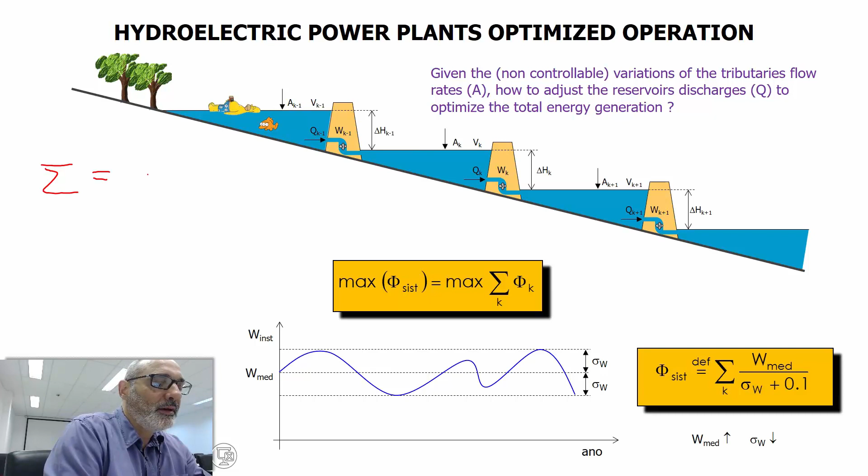If you want to optimize the sum of three terms, for instance, A plus B plus C, you can allow for the perfect situation, which is to have all three terms going up. This is perfect. But you may have a situation in which one of these goes down, but the other two go much higher.

So by sacrificing this one, you enable a more significant optimization of the other remaining terms. So that's what we're going to see happening in our simulation. And this is especially related to the size, to the volume of these reservoirs.

During the year we have an instantaneous total generation, and because the flow rates are varying, the instantaneous total generation is going to vary during the year, as I'm showing you here.

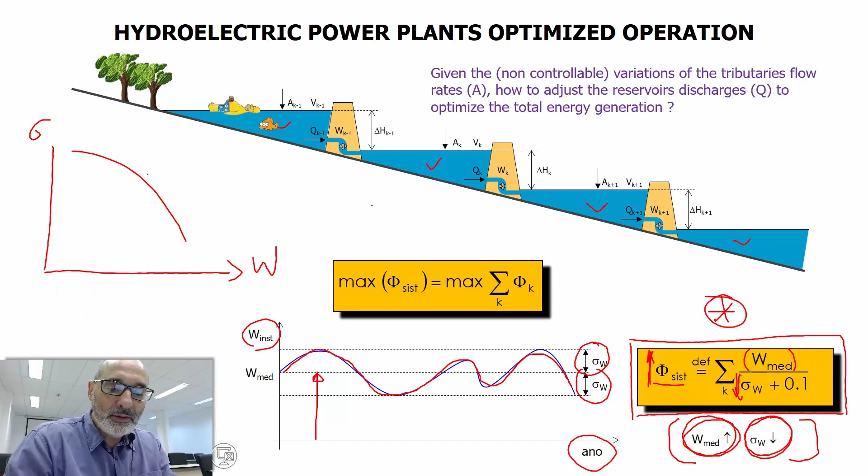As I said, this is completely artificial. You can, for instance, have different definitions. You can square this, for instance, and have another optimization function. The one that is written here is the one that we're going to adopt, but we're also going to have other definitions in order to verify if the definition of the optimization function affects the final result, or the final conclusion at least. So let's see.

Now we have to model. So we have already an optimization function, and we're going to have others. Okay, but we have at least one. So we want to optimize this optimization function, which is the sum of the individual optimization functions, and we also have restrictions. This is a constrained optimization problem, actually. And what are our restrictions?

Those restrictions are related to mass balance in the reservoir, as I'm showing you here. So the variation of the total reservoir volume, K here is for the kth reservoir. We have reservoir number 1, 2, 3. This equation applies to all 3 reservoirs. The variation in volume is equal to the input flow rate of the main river, plus the tributary flow rate, minus the downstream flow rate. So this is very, very simple. This is the first restriction.

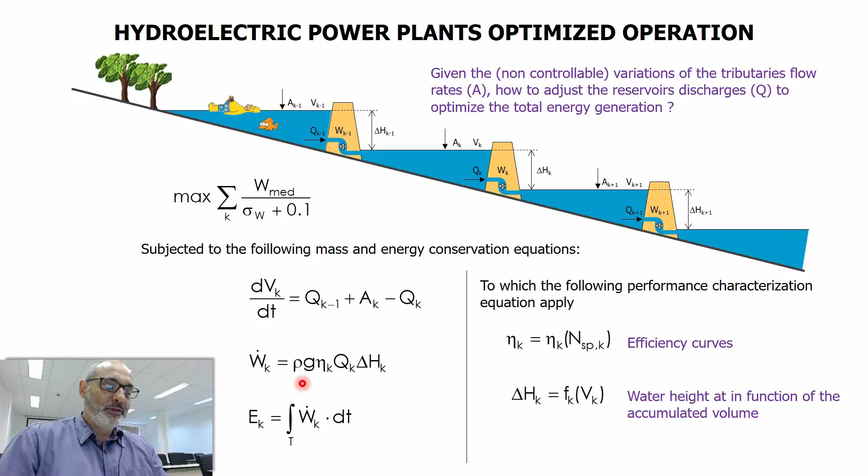Another restriction is the turbine performance, that's the conservation of energy. So the instantaneous power generated by the turbine is equal to the formula that we derived in a few slides back, multiplied by an efficiency factor here. Eta here is related to the efficiency, which is, going back some slides, related to these curves here.

So, and that's the central point. So you have mass balance, you have performance equations, and well, if you want to assess the total energy generation, you simply integrate the total power, related to this performance, that's the turbine performance, which is characterized by its efficiency.

So eta is a function of the specific rotation, as I mentioned. And you also have a very, very important variable, to be more precise, which is related to delta H. We call it head, that's the jargon, but it's the height of the reservoir, or the water level. And this actually relates to the volume through the reservoir. We could say that delta H is a characteristic of the reservoir performance, and this is related to its geometry. So we're going to construct this model.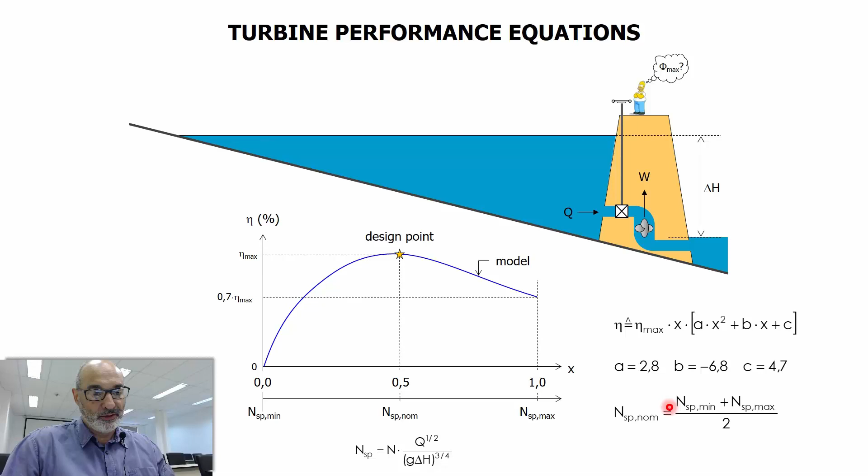The nominal point is the average between 0 and 1, or the average between the minimum and maximum specific rotation. Okay, now the reservoir.

This is the most important part, because you get this from the geometry of the reservoir, and what I want to show you today is how these affect the overall performance. Suppose the geometric form of our reservoir is something like is drawn here, a kind of a pyramid cut. So you have this form, this base, and you have all the parameters.

That's the extension, that's height, and so on. Capital A, B, and beta and alpha are the geometrical parameters. What we want to get here is a formula relating delta H to the volume. That's very important.

You know that the total volume is one third of the height of the pyramid multiplied by the base area. The height here is L, and the area you can get from here, this formula. I'm going to pass very quickly, because the idea is not to make these calculations—you can do it by yourselves afterwards. And you get this final relation here.

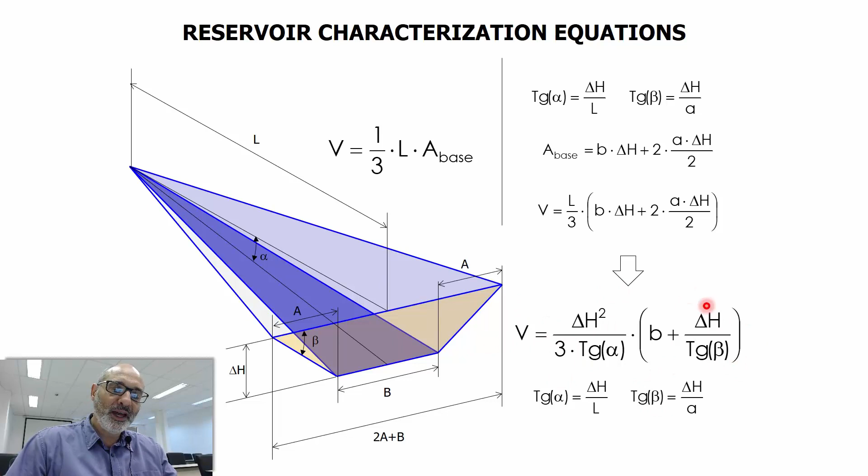The formula that we have to use is this one, and by getting some typical numbers we get this kind of result. 5 kilometers extension—this is a small reservoir—100 meters, 200 meters, 50 meters, these are typical values for small reservoirs in the Tietê River. By doing the calculations, we get 0.025 cubic kilometers of water in this reservoir. Comparing this with Itaipu, 19 cubic kilometers, and with Belo Monte, 2.5 cubic kilometers, you get these typical numbers.

Another problem that is interesting to emphasize is the effect of silting. You have material constantly being deposited on the bottom of the reservoir, and this solid material occupies volume. So what happens is that during time we have what we call silting, and so for a given volume you have a higher height here in the reservoir.

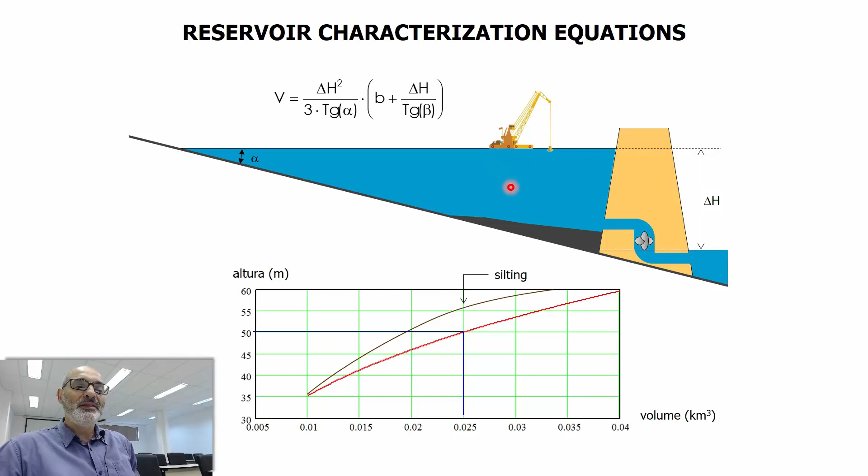That means your reservoir is losing efficiency in terms of its storing capacity. Periodically you have to remove this material to recover its original performance, because the design was made assuming a given nominal volume for the reservoir. So silting is a very important problem—it's related to OPEX, to maintenance cost of this power plant.

So we're almost there. Combining these equations, we have flow rates here that vary in time. We are going to adjust Q1, Q2, and Q3 in order to maximize the overall power. The individual powers are given by this formula.

The specific rotation goes here, Q the individual flow rate, and delta H goes here. What I want to emphasize is that these are conflicting effects, because in order to have maximum efficiency, which corresponds to x equals 0.5, you have to have this relation.

A square root of Q multiplied by delta H to the minus 3/4 equals constant. No matter what you do with the flow rate, if the corresponding height satisfies this relation, you always have maximum efficiency. But when you look at the reservoir performance, you see that when Q increases, you have a tendency to decrease the level here.

If you increase the flow rate, this is going to decrease if A1 is constant. So in order to maintain nominal condition, it would be interesting to maintain this relation, and this conflicts with this. Okay, so that's the base of the problem that we want to solve in terms of the instantaneous optimization. Okay, so we have everything now in order to do the simulation.

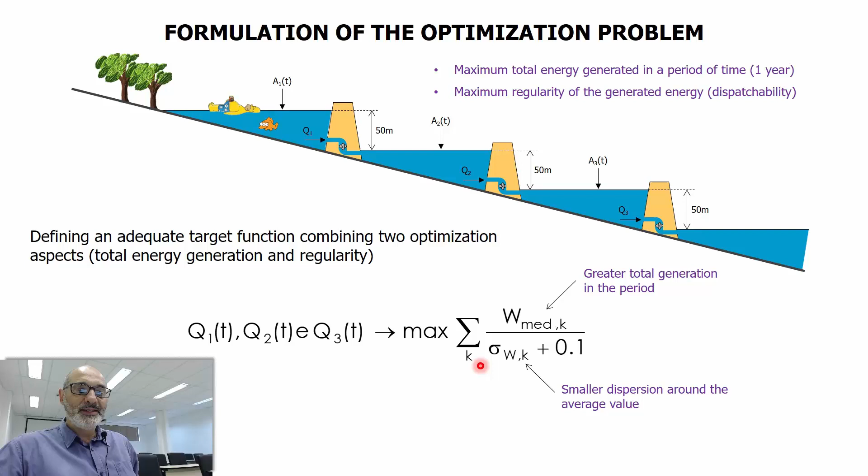Okay, we want to adjust these flow rates in order to maximize this optimization function. And just to repeat, we want to maximize average power, because in the whole year this is going to result in a greater amount of total generated electricity, and we want to simultaneously minimize sigma in order to have more regularity.

Okay, so let's see the optimization strategy. It's very, very simple. I'm going to explain here. It is written here, and I'm using only two variables because it's simpler to explain. So follow me, bear with me. You start by stating that the flow rate Q1 is going to be this value and Q2 is going to be this value. Then you make a random variation of one of those.

So let's say that you step here. In your software you're going to test if this increases or decreases the objective function. If it decreases, you discard this variation. If it increases, as here, you see you're closer to the optimal. So if it enhances the objective function, you keep this variation. And that's it. Then you repeat the process in the other direction.

This one, it increases. Okay, you keep the variation, and you keep doing this. So you have a heuristic that leads you to the optimum. So that's what's going to be done. I'm going to show you how. Yeah, and that's the software. So let me explain the software.

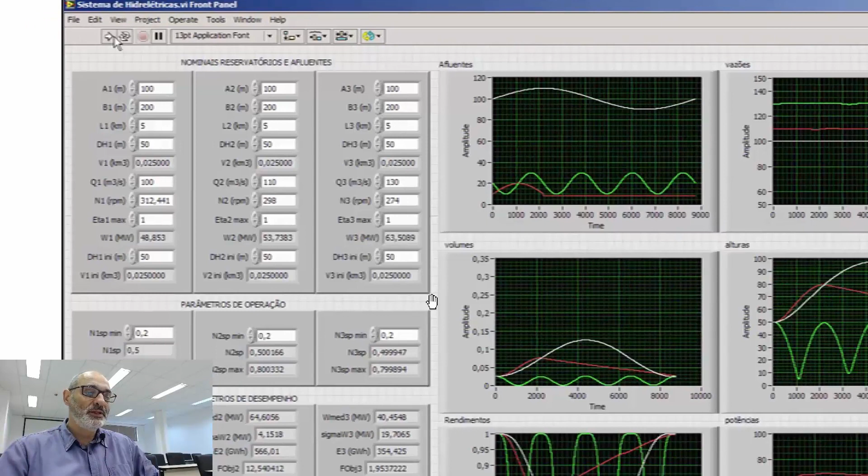So this is the control panel of this software. It's a simple software actually. So these are the reservoirs characteristics, A, B, L, DH, and so on. And that's the total volume of each of these three reservoirs. Those are the turbines, the parameters that define the turbines, and these are results actually. So instantaneous power of each turbine, and total generation.

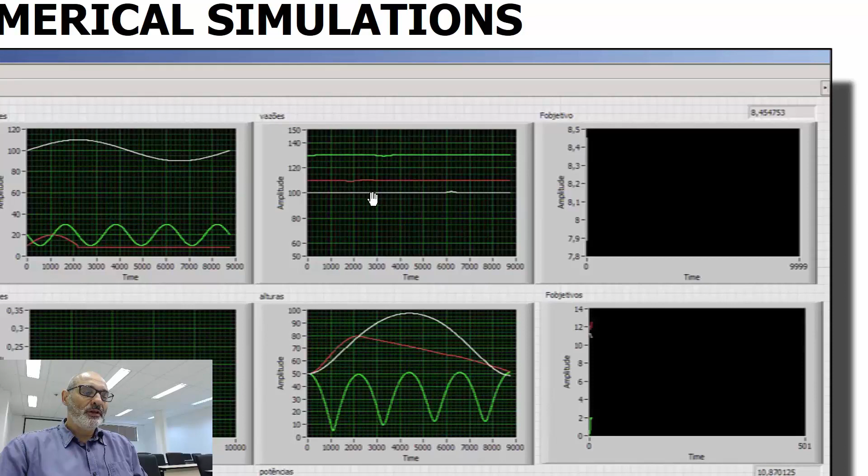We see these. Those are the annual values. So those are the river and tributaries flow rates. Here are the individual flow rates of each reservoir. So this is Q1, Q2, and Q3. Here we have the volumes of each reservoir, the corresponding heads, H, this is delta H, and this is efficiency of each turbine during the year. Here you have time, and the power, this is W, during the year.

So what we're going to do, I'm going to start the software in a moment. We start from an operating scenario. For instance, constant flow rates, or almost constant flow rate in each reservoir. So this is Q1, Q2, and Q3. I'm going back one slide. This starting point here means constant flow rate during the whole year for the three reservoirs.

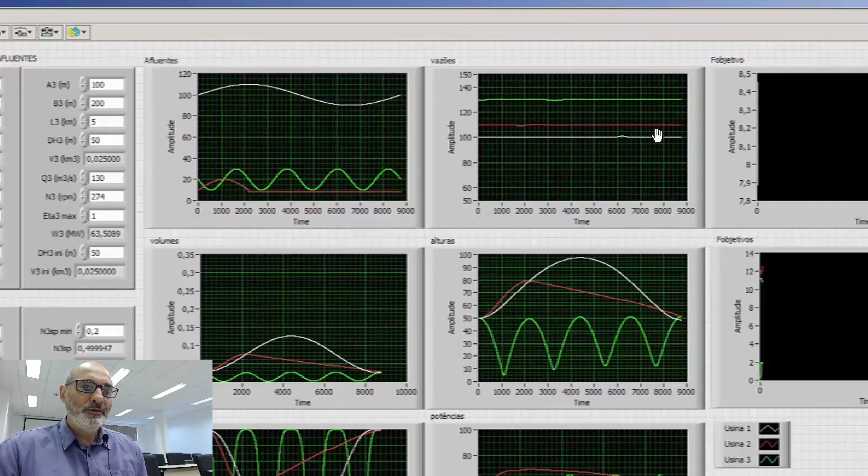And what we're going to do next is to vary each day's flow rate. Because if I'm not mistaken, no, this is hours. So this is the whole year in hours. So we are going to vary the flow rates for every hour during the year. So we make a random variation here. If it enhances the objective, we're going to keep that. If not, we discard. And we're going to see the results here.

In this graph down here you're going to see the individual objective functions. And in this graph here is the total objective function, the sum of these three. Let me start the software. You see here, it's varying the flow rates, and you see that the overall objective is increasing. Also the individual objectives are increasing. But something interesting is going to happen. I'm going to pause the software. You see that.

Well, let me go back a few. You see that we started, for instance, the green reservoir. I don't remember which one is which, but the green reservoir in the beginning of the optimization had very low efficiencies. For instance, 0.7. Okay, and during the optimization, you see here that the individual efficiency is increasing. So that's why the overall efficiency is increasing. You see that very clearly.

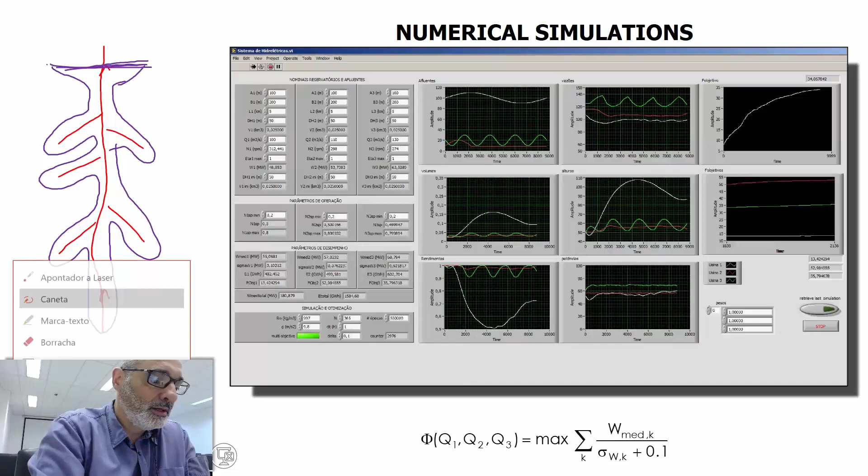How do you do this? You do this by making more dams. So in addition to this dam here, you build here, and here. And then your lake is going to be something much smaller. So the total volume is much smaller, but it floods a lot less area. I'm not questioning this, but you have to be aware that this influences the overall system, to the point that it would be better not to have these hydroelectric power plants. That's my opinion, actually. It would be better to have, I don't know, a biomass thermal power plant.

So the second question is to analyze the volume of the reservoirs. We're going to compare the operation with small and big reservoirs to see what's the difference. And the number that we can use is going to appear here, just to be more objective. This number I'm emphasizing is the numeric value of this number here. So let's see how it goes. Now I don't need to do the simulations, I'm just going to show you the final screens.

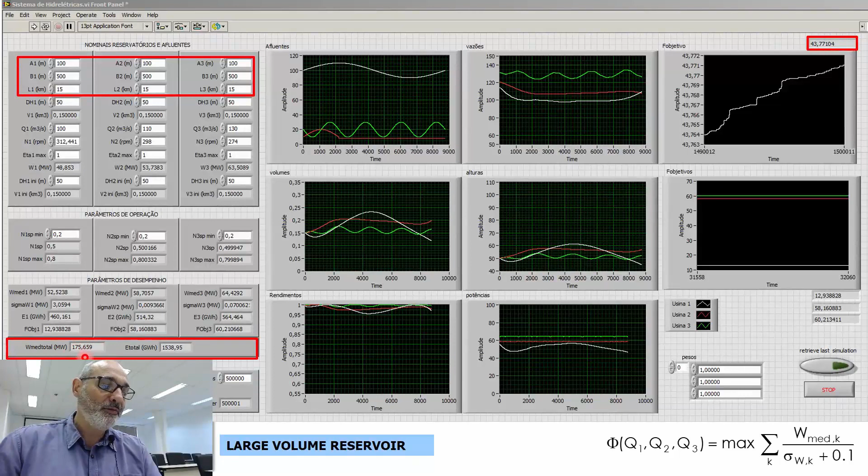I'm going back one slide. So we had 40. That's our numeric value for our optimization function. And simply by working with a bigger reservoir, we have an increased generation. We can also see this in terms of the average power, and the total energy generation in gigawatts and in megawatts.

So we had 1,000, I can't see this, 1,385 here, and we have here 1,538 gigawatt hours. So we managed to increase the total generation simply by working with a larger reservoir. So that justifies what I'm saying, that it's better to have bigger reservoirs.

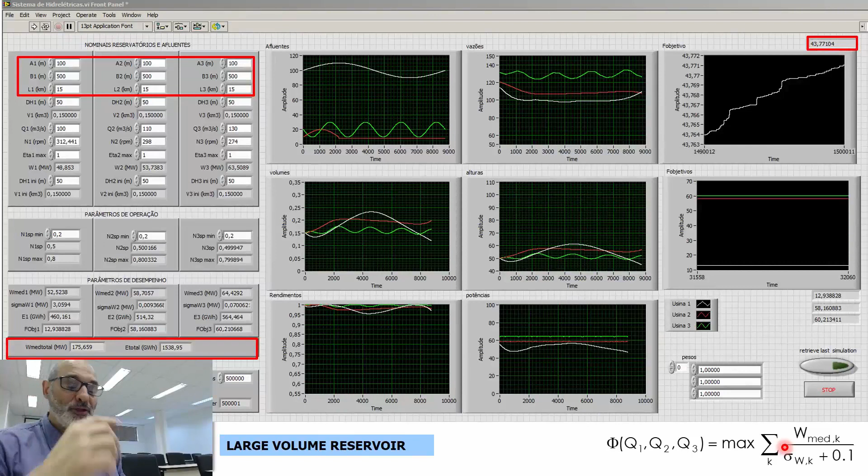So now let's see the influence of the optimization function. I'm going back one slide. So instead of adding the terms, yeah, go on. If you increase the size of the reservoir, how about your turbine? Perhaps the capacity may not be enough, I don't know if it has any effect on the turbine. Sorry, I didn't understand what? My question is if you increase the size of the dam or the volume. The volume, okay? Yes. Then how about the turbine? No effect on it?

Well, everything is the same because the turbine is chosen from the nominal values, which are the annual averages, and this is not being changed in this simulation. So the design does not change by simply changing the volume of the reservoir. I understand your question, because if you're varying the reservoir, you should change the design and the choice of turbine. But as I explained, this is chosen from the nominal values, which are not being changed here, because the flow rates are not changing and the heights are not changing. So DH is the same, 50 meters and 50 meters here. You see?

The point is that with a bigger reservoir, you can use its height. I don't know if you see here, but the heights vary very little. So with a bigger reservoir, the height of the reservoir does not have to vary a lot to accommodate these variations. You keep the height constant, and that tends to produce a higher instantaneous efficiency, because you don't deviate too much from the nominal point with a larger reservoir. That's the point.

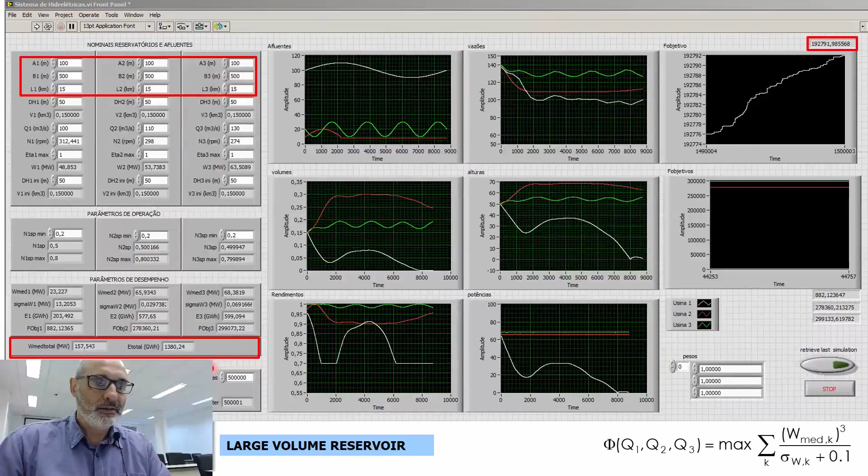So you see that it's better. I think I have a third optimization function. Now I have the average power to the third, and still the result is the same. It's better to have a bigger reservoir. We have to compare this number: 18 compared to 19, it's too small here. 192 hundred thousand compared with 180 hundred thousand. So it's always better to have a larger reservoir.

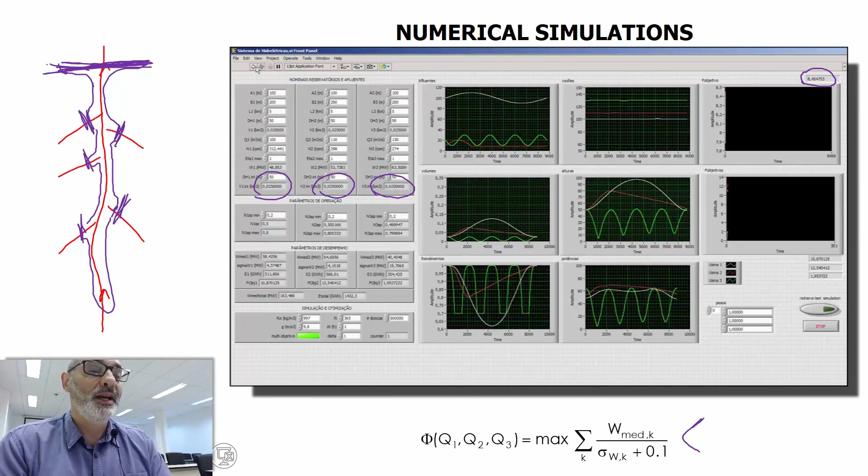Let me see if I still have that. And that's why, regarding reducing the size of the reservoir in Belo Monte, I sustain that if we make the proper calculations, we might conclude that it would be better not to construct this reservoir at all. It's very good in terms of civil engineering, because you have more civil engineering structures and have to spend more concrete. So for those who supply concrete, it's a very good business, but for electricity generation, it's not good.

Okay, so that's my point regarding Belo Monte. Okay, now just to conclude, that's the final slide. Yeah, I managed, I still have 5 minutes. Sorry. Okay, so that's the last slide, just to justify what I call the functionality of the reservoir. Functionality of the reservoir in a system such as this, as I'm showing.